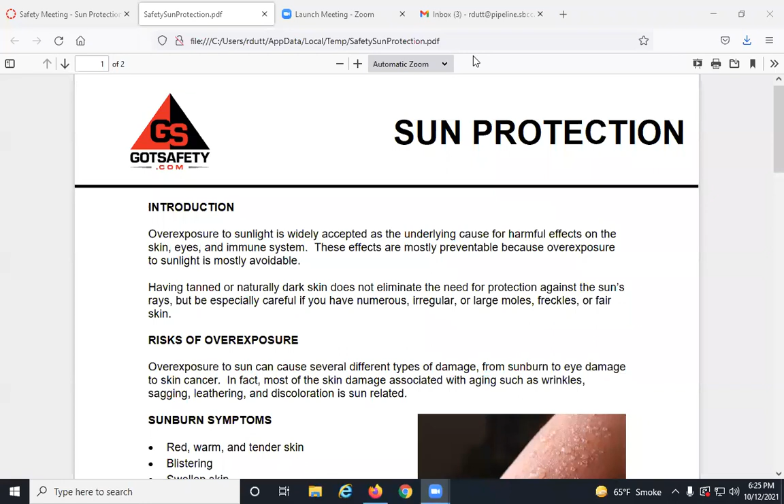Too bad Michael's not here. He could be your guy. Thank you, Zach. Appreciate that. I would have just... Every time I'll forget.

Every damn time. Okay, so this safety topic is sun protection. Introduction. Overexposure to sunlight is widely accepted as the underlying cause for harmful effects on the skin, eyes, and immune system. These effects are mostly preventable because overexposure to sunlight is mostly avoidable. Having tanned or naturally dark skin does not eliminate the need for protection against the sun's rays, but be especially careful if you have numerous, irregular, or large moles, freckles, or fair skin.

Clara, would you read that, please? Risks of overexposure. Overexposure to sun can cause several different types of damage, from sunburn to eye damage to skin cancer. Most of the skin damage associated with aging, wrinkles, sagging, leathering, and discoloration, is from sunlight. All right, Tyler, sunburn symptoms. Sunburn symptoms: red, warm, and tender skin, blistering, and swollen skin. Keep going. Eye damage symptoms: red, dry, and painful eyes, gritty feeling in the eyes, possible cataracts and macular degeneration.

Evan, skin cancer symptoms. Skin cancers often take the following forms: pale, wax-like, pearly nodules, red, scaly, sharply outlined patches, sores that don't heal, small mole-like growths. Periodically check for the symptoms of skin cancer. Usually, if you catch it early, it can be cured.

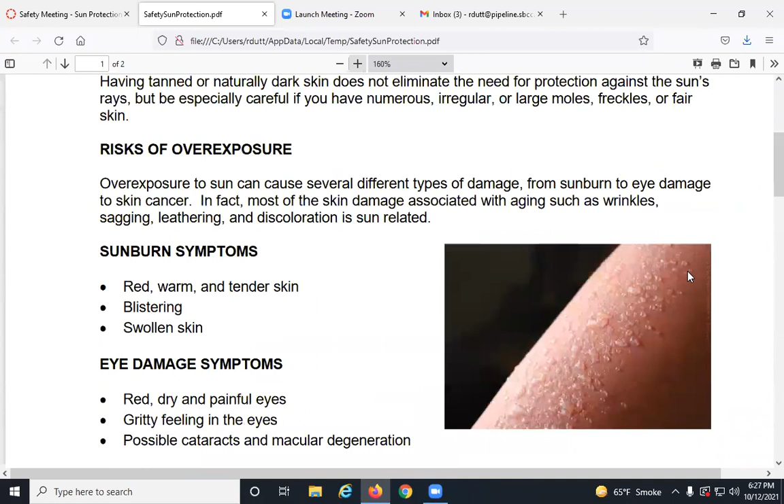Zach, go ahead. I'll read the conclusion. Overexposure to sun can have terrible consequences. But as long as you use sunscreen, wear the proper clothing, and follow the other tips listed, you will be able to avoid sunburn, skin cancer, and eye damage. Anybody have any questions or comments or anything about that?

Everybody swimming on a job site. Swimming on the job site? What's that now? It said if you go swimming or if you're sweating, then you should be fine. Yeah, well, swimming on the job site. You're going to see a video today of a job that's right on the ocean. And if I was on this job, I would probably be taking afternoon dips or lunchtime dips if it was okay. So,

Yes. I saw some of the guys wearing like wide brim hats and the hard hats over them. Is it fine to do that safety wise? Or not like that? As long as your hard hat, they float on your head, right? The adjustable band. As long as it floats on your hat, that's all you need. There's no chin straps on hard hats. I mean, they maybe make them, but I've never seen them.

Should I wear a wide brim hat to the thing on Saturday? You should always wear a brimmed hat. You should can and lose the ball hat. So should you, and so should you, and so should you, if you're in the sun all day long. It's okay. I have skin cancer, multiple skin cancers. I've had them cut out here, squamous cell carcinoma here. I think one here. It's a lifetime of sun damage before I knew any better.

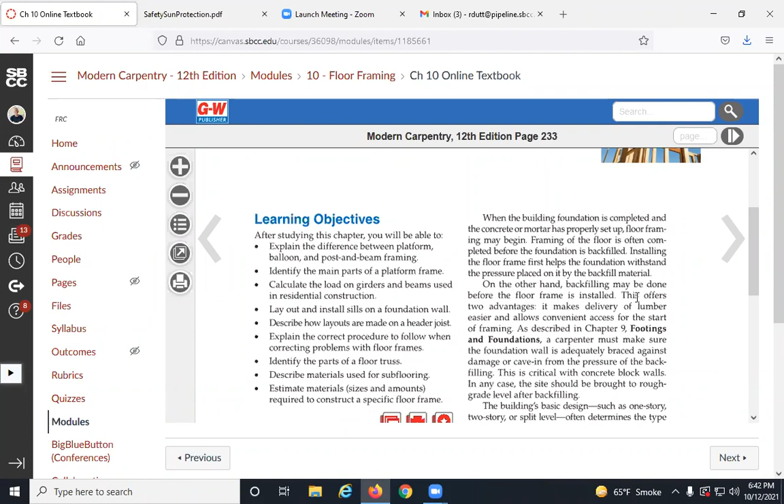On the other hand, backfilling may be done before the floor frame is installed. Yes, absolutely. This often has two advantages. Makes delivery of lumber easier. It absolutely does. Carpenter must make sure the foundation wall is adequately braced against damage or cave-in, blah, blah, blah. 1-story, 2-story factors include earthquakes may be the greatest hazard. Snow loads, we don't have to talk about those now, do we?

So now here's platform framing. A frame of joists provides the support for the walls of the first level of the building. Ceiling joists or floor joists for the second level rest on the top plate. So let's see, does this talk? Okay, so this is the figure that is talked about in platform framing. So we'll get to that. Did I miss something? Yeah, I'm sorry, I did.

So types of framing, 3 types. Platform framing, also called Western framing. Balloon framing, which is no longer used in new construction, but carpenters who remodel or repair should know about it. And if you heard that back and forth with David and I, I insist that framers do balloon frame gable end walls. A lot easier. And then post and beam framing, also called plank and beam. It's different from the other two. Its heavy structural members are at least 4 inches thick.

Kind of construction covered in chapter 25 is post and beam. So I don't think they even touch upon it in here. In post and beam construction, you have a post, 4x and larger. And then you have a lot of let-in joints, dovetail joints, half-lap joints, pin and peg joints.

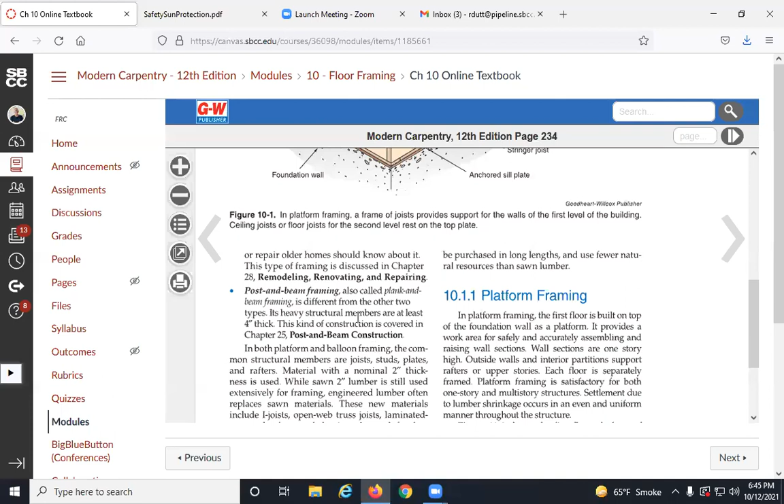Hey, Rodney, why do you say that they don't use herringbone bridging? Oh, you never see it. Herringbone bridging is a staggered bridging in the joist bay, floor joist or ceiling joist. We don't use it anymore because there's more efficient ways to go. And we pretty much use TGIs.

We're still using solid 2x members for floor joists, but more often than not, especially in new construction, it's truss joists. There's a whole section in here that says it's called regular bridging. Yeah, we don't do that around here. I won't see anybody do it. It's not necessary. Blocking is a lot easier to do.

Well, they say it's just like an X of 1x3 or 2x2 in the corners. Oh, just in the corners? Something like that, between the joists. Yeah, we'll see when we get to it, but let's take a look at it. You don't see it anywhere anymore.

So here's platform framing, right? So you build a wall at a time on top of your joists, and we'll go through what consists of the floor joist system in terms of framing, and we don't use let-in braces anymore at all. We use steel straps in wall framing. I'm jumping ahead a little bit, but it's all mixed together really. In framing, you don't have floor framers and wall framers and roof framers. You have framers, and you frame everything.

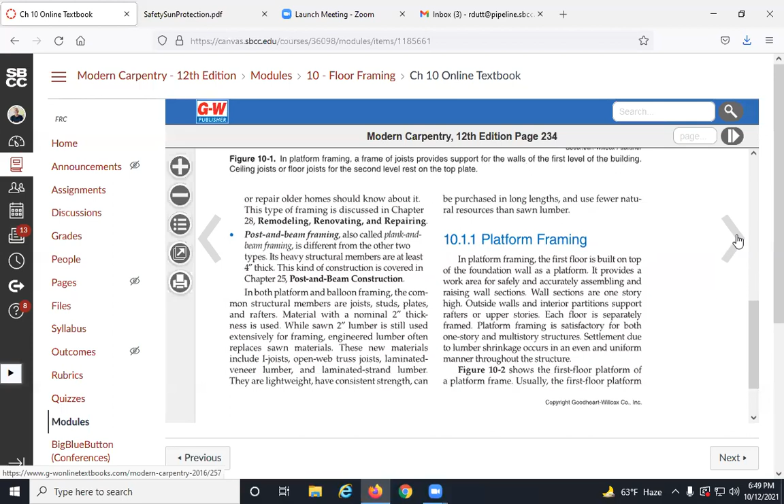Platform framing. So post and beam we're probably not going to talk about. We're going to talk about platform and balloon. So okay, there's a platform frame wall. We'll get into the framing members as you get into wall framing, but let's try to keep it to floors now. Outside walls and partitions support rafters, each floor separately framed. Platform framing is satisfactory for both one-story and multi-story structures. Settlement due to lumber shrinkage occurs in an even and uniform manner throughout the structure. Okay, that's good. First floor platform of a platform frame, figure 10-2.

So that's pretty typical with a sill, a pressure treated mud sill. Sill plate, PTMS, pressure treated mud sill laying on a concrete foundation. And then rim joist, the joists hung inside that rim joist. And then they build a plate and walls on top of that. First floor sill is anchored to the foundation. So that sill is bolted to the foundation with anchor bolts, which we heard about in your foundation test, right? Anchor bolts around here are what? 5/8 by 10 galvanized anchor bolts. Exactly correct. 5/8 by 10.

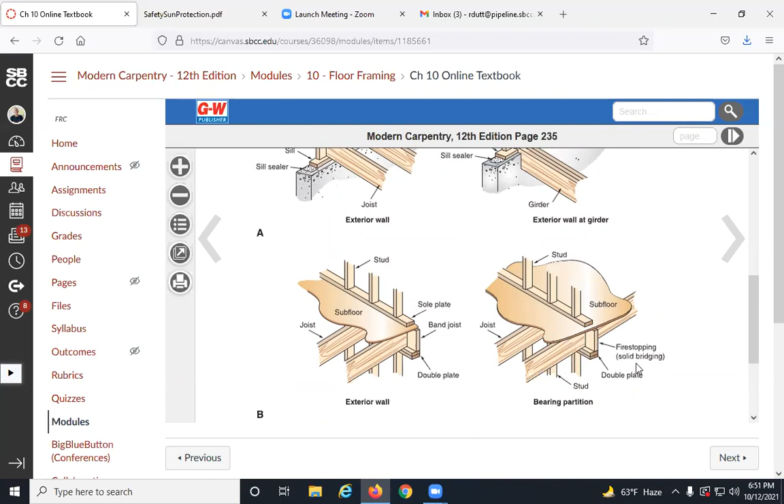So yeah, fire stops. That's in walls. But anything over 10 feet, you have to fire stop it. And when your ceiling joists, which is what these are right here, pass over a bearing partition, they need to be blocked in between. It's called fire stop or solid bridging, but I call it blocking. And there's a band joist. That's on the outside. That's cool. Okay, what else we got here?

Platform framing details, sill sealer, second floor framing similar to the first. What's that? Did I miss something there? Usually the first floor platform rests on a sill. Right there. There's the sill. This is a wood member that's attached by bolts or other metal fasteners embedded in the foundation. The anchor bolts we talked about. The platform rests on an underpinning. That would be the foundation wall, the poured foundation wall.

And this place looks like maybe a block wall that comes up out of the ground, out of a foundation. Hard to say. Can't see it all. Okay, so sometimes the platform rests on an underpinning. This is a wall made of short studs that extends above a low foundation. That's called a cripple wall. It's usually used on a house that is not to have a full basement. Fire stopping can be used to prevent the spread of a fire.

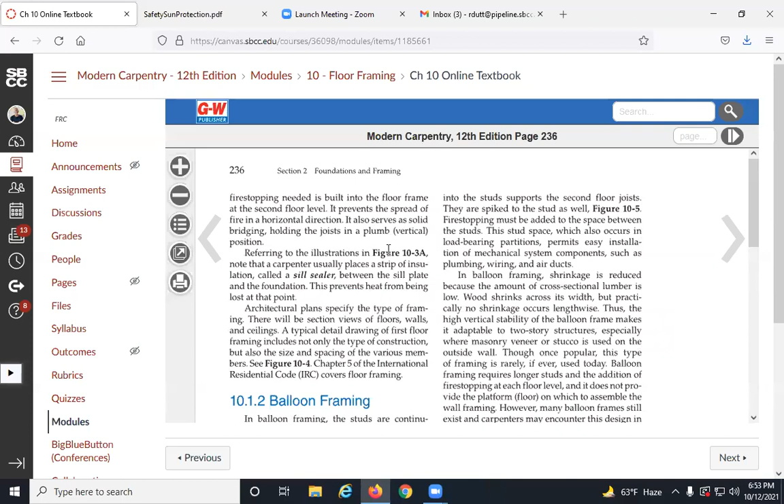Fire stopping is needed to be built into the floor frame at the second level. Absolutely. It prevents the spread of fire in horizontal directions. It also serves as a solid bridging, holding the joist in a plumb position. So it keeps your joists from rolling over if they're blocked in between. But I'm not going to jump there yet.

So what time is it? Okay, we're going to finish this page and take a break.

Referring to the illustrations, note that the carpenter usually places a strip of insulation called a sill sealer. Okay, so in balloon framing, let's just jump to this sill sealer. So see sill sealer there on top of that concrete stem wall, which is a foundation wall, right there. Some sill sealer, piece of insulation or something, even though it's pressure treated mud sill, to keep the wood off the bare concrete, put a sill sealer underneath. It's a good idea.

Now, some people do this where they set the bottom 2x6 mud sill all the way flush with the foundation. And then they run the sheeting out over the foundation. I don't mind that so much at all, actually. But I like this better, it's cleaner. Because this is set up really well for plaster. You get 7/8 of an inch of plaster on top of that with a weep screed and the plaster.

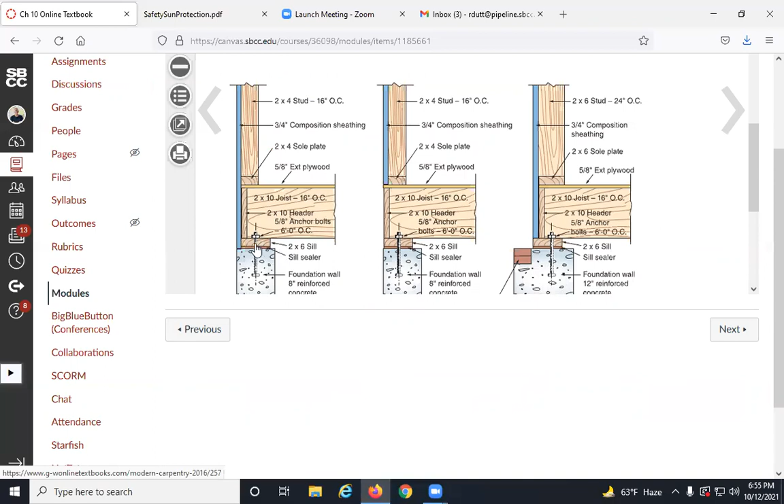And then the plaster, the lath laps that joint, which is the one thing I kind of like about hanging the sill flush with the foundation wall and the sheeting over it, is to drop the sheeting down slightly so it bridges that joint. Because the last thing I want to do is get anything from the exterior underneath that sill. Just something to think about when you get down to there.

Why is the middle one your least favorite? Because it leaves all this. I like to see the sheeting go all the way down. I think it shears the whole thing. Didn't James say the sheeting wicks water from the outside if you do it all the way over? It can wick water if you don't do it right, if you don't seal the bottom of it. But how much water is it going to wick? In the first place, water's got to be in proximity to it to wick water, right?

So if you're 6 inches off the deck, that's your minimum, and that's how far your piece of plywood is. You should not get water any closer than 6 inches. And water 6 inches away isn't going to wick up your wall. Now, if it floods up and comes over that plywood, then yeah. If it gets to the edge of the plywood and it's not sealed, then it can certainly wick water. So this is a better way to capture it than hanging it out. But this is the way I prefer to do it.

And in balloon framing, the studs are continuous. So I'll show you after the break. I'll just draw something for everybody in case anybody's not seeing in their mind's eye what a gable-end balloon frame looks like. I'll do that really quickly.

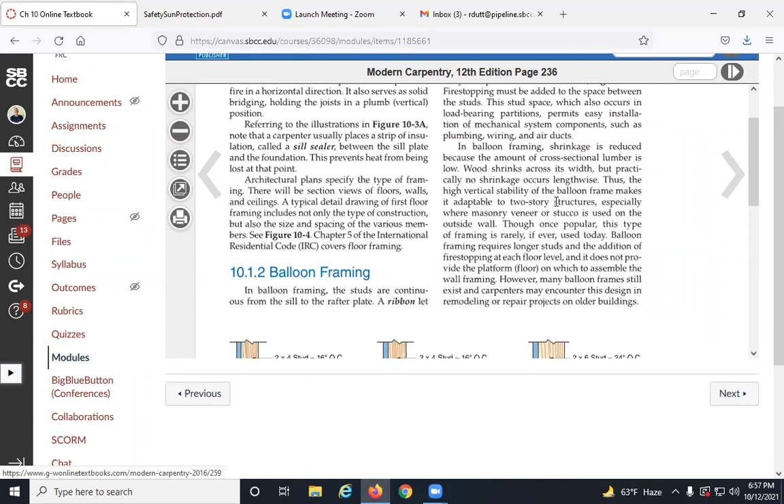And so let's come back for girders and beams at 7:10. We're gonna break until 7:10, gang. I'm gonna stop the share.

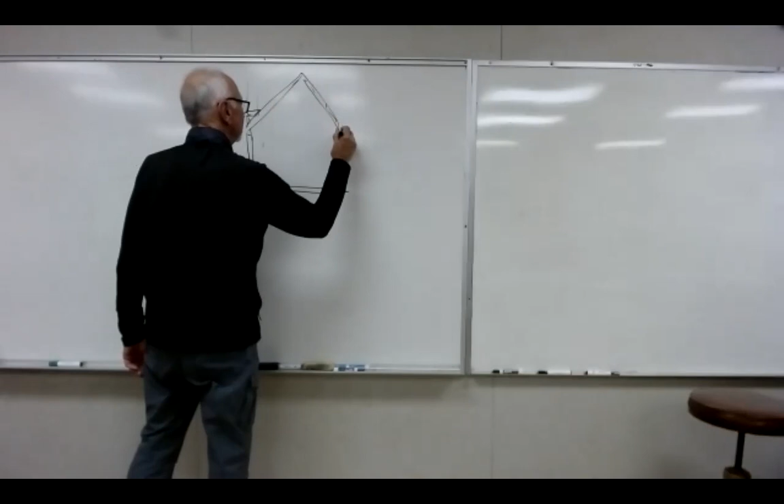That's platform framing. In a gable end wall, platform framing would be to build an 8-foot plate that's connected everywhere else, then build a gable end wall with a plate and studs, which would all be crippled studs. What that does is create a hinge point between the two plates. It's a lot easier and better just to snap out on your floor or slab and gable end, and frame it like that. That would be balloon framing.

There's a variety of ways to hang ceiling joists. You can run a ribbon and put hangers to hang your joist. There's a variety of ways to do it, but I think the best way is to hang a ribbon. So if it's a side view of a stud, one of these studs continues on up, a ledger consistent with your ceiling joists, and then your ceiling joists are hung with hangers, U26 hangers. That'd be your ceiling. I hope that made sense.

But the only thing you want to balloon frame is a gable wall. When we do it nowadays, we don't have those long lengths anymore. We don't use those anymore.

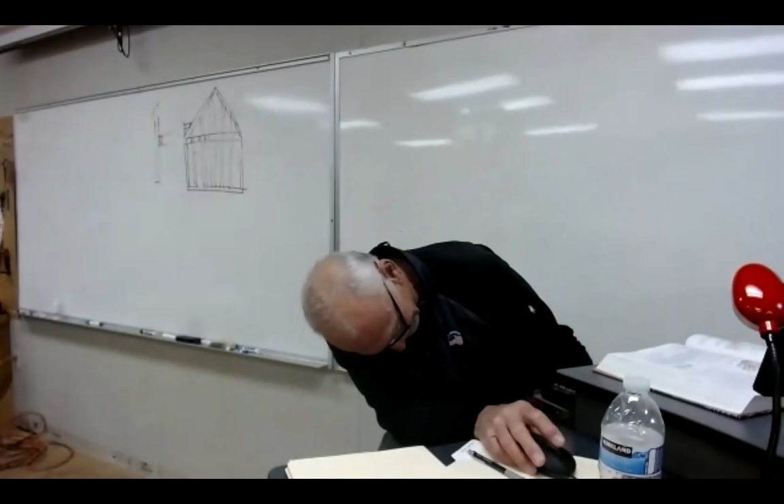So let's go back to the book. I'm gonna drop this screen again. We are recording, we're going to show the screen. Girders and beams, yes. Come on, does it come up? Okay.

So LVL, who knows what that means? Laminated veneer lumber, exactly correct. LVL and glue lam beams, floor beams are what's happening, and so are truss joists. But really, you're going to go with whatever the plans call out. It depends on the area you live in, what the architects and engineers are specifying, and that's what you're going to follow, period.

So joists are the horizontal members of the floor frame. They're also the horizontal members of the ceiling frame, but we're not there yet. They rest on top of the foundation walls, girders, and the top plates of the second stories. Span is the distance between the walls. Usually the span is so great that additional support must be provided. Girders, called beams, rest on foundation walls, posts, or columns underneath the house, and they support the joist at their midpoint. Most joist spans have a mid-span beam to support them, so they can run long joists instead of short joists. Girders may be solid timbers, built-up lumber, engineered lumber, or steel beams. Sometimes a load-bearing partition replaces a girder or beam.

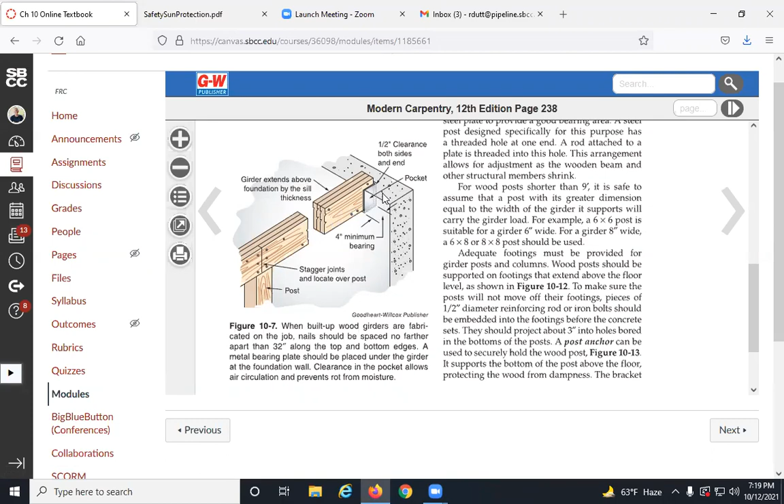Glue lams are a bunch of wood pieces glued together in the factory. Steel beams, we do use those here quite a bit, wide flange and narrow flange, but mostly wide flange I-beams or W-beams. If your engineer calls for it, he's going to tell you how to make the connections. It's going to be a steel column or a wood column supporting it, and if it's going to get Nelson studs attached so you can bolt wood to it and wrap it to get rid of the look of the steel, which generally we don't show.

A Nelson stud is a welded-on threaded stud anchor, usually 3/8 but they can come 1/2 inch or bigger, in various lengths. So you can drill holes and bolt a piece of wood, but you can nail other things too. I just skipped one - steel beams, posts and columns.

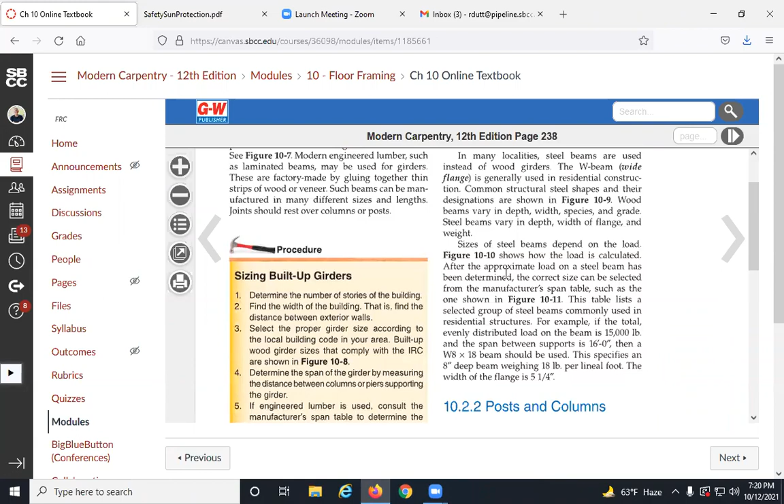Just for instance, the size of steel beams depends on the load. 1010 shows how the load's calculated. Where's 1010? Let's see. Is it 1010? Nope, 10.8. There's 1010.

This diagram shows the method of figuring loads for the frame of a 2-story home. So it measures, for instance, the roof. For a dead load, it's the weight of the wood shingles, and they equal 10 pounds a square foot, which isn't that tough to figure out. To figure the live load, you've got to account for wind and snow requirements, usually 30 pounds a square foot, and then get beams and lumber engineered to meet those requirements.

But don't get too far ahead of yourself, because almost all that stuff, if you have to do it, is going to be spelled out for you by the engineer and/or the architect, and you just have to follow directions.

For example, if the total evenly distributed load on the beam is 15,000 pounds and the span between supports is 16 feet, the table will tell you that a W8 by 18 - that's an 8-inch deep by 18-pound-per-foot W-beam - should be used. So the span tables will tell you what you need. A lot of engineering you can figure yourself with span tables. Personally, I like to let the engineers do it, but I'm willing to engineer some stuff myself too, especially over-engineering it.

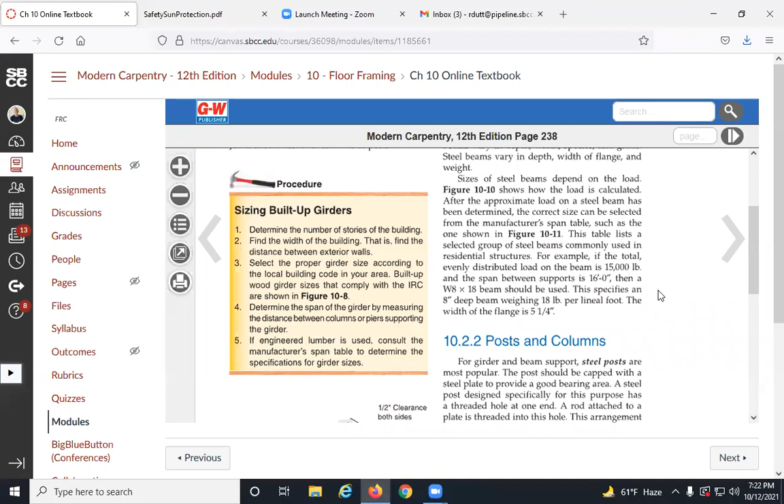Posts and columns, for girder and beam support - steel posts are most popular, and we use them a fair amount, but we use a lot of wood too. We could have used steel columns or steel posts in the shade structure too. For example, a 6x6 post is suitable for girders 6 inches wide, and for a girder 8 inches wide, a 6x8 or an 8x8 post should be used.

Would they rust though? No, no, they have to be galvanized and painted, treated like they're going to be outside, and then they wouldn't rust. It could rust if you get through the protective coating - it could rust where wood won't, but wood rots.

Adequate footings must be provided for girders, girder posts and columns. Wood posts should be supported on footings that extend above the floor level, as shown in figure 12. Okay, let's see that one.

Steel's probably more expensive, huh? No? Oh, that's surprising. But what makes them more expensive is the welding of the flanges - the welding and the flanges make the steel posts more expensive, but the wood's now more expensive than the steel. Oh, the actual wood, that's crazy.

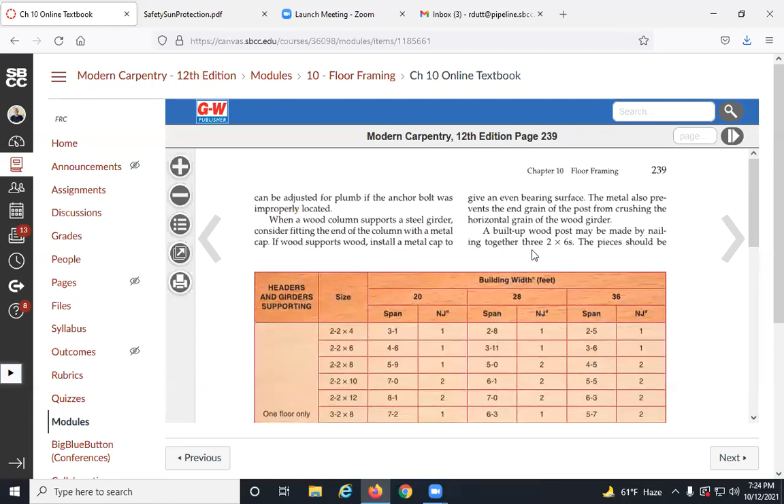You can do a built-up post nailing 3 2x6s together, but then why would you if you can go to the board store and buy a 6x6, unless you want to use some material that you just got to get rid of.

There's some various structural steel shapes. There's that table for how you figure live and dead loads.

But again, it's not likely you're going to be figuring this anytime soon. There's going to be people to figure this out for you until you get way more experienced, and then you can figure it out for yourselves. But it's nice to try to figure out what's going on.

So that when you're told what to do, at least you know, so you can say, hey, why aren't we using a W8 × 21 on that? Because it looks to me like the span on that for 10 foot is 29.1, and you're using a...

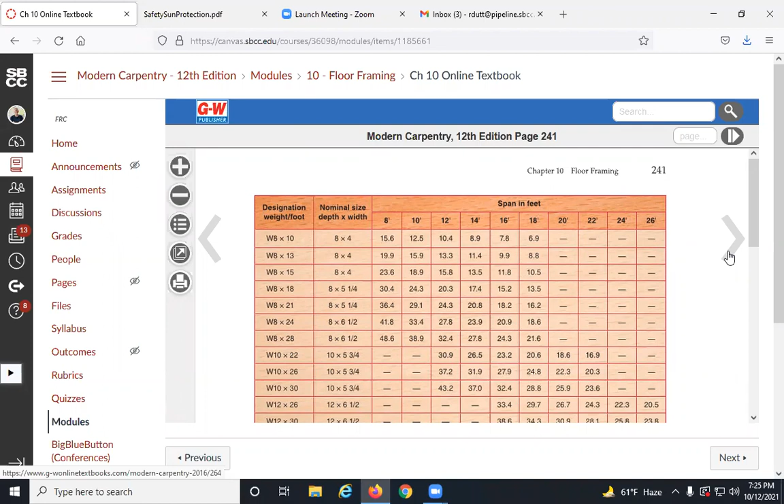Really? I thought you were just a laborer. Dude, you're promoted. Okay.

Framing over girders and beams. So when you have a lap, right, so right here, you've got these joists lapping. They lap together and they usually lap 2 feet each way.

And they want to lap over something, a girder or something that supports them where they lap. Not midspan, but you need something to support the lap. They can't just have a lap hanging out in space.

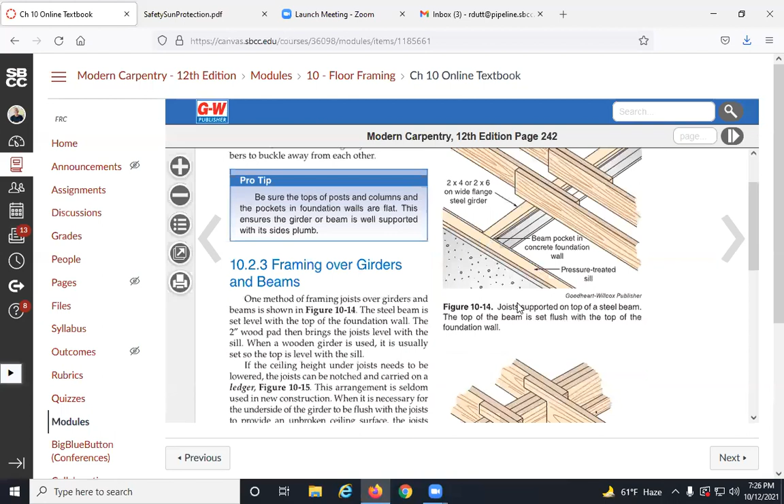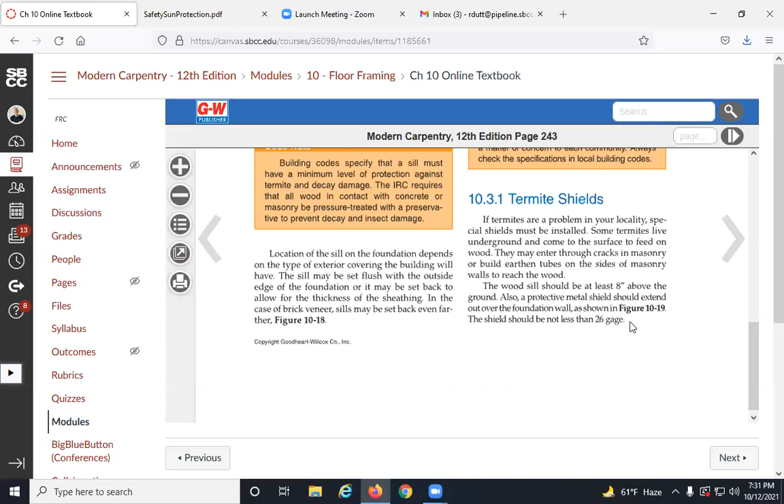The wood sill should be at least 8 inches above the ground. Also, a protective metal shield should extend out over the foundation wall, as shown in figure 10-19. It should be not less than 26 gauge thick steel. So there's a termite shield. That's that metal shield. So I guess it keeps the termites from climbing up your foundation walls and then getting onto the sill.

They somehow hit that metal and go, oh shit, guys, there's metal up here. We can't go any further. I don't know why it does that. I've never seen one of those either. Exactly, have massive brains. No, they have a hive brain, right?

Canada and Alaska are considered to be region 4, Hawaii and Puerto Rico region 1. In areas where termite damage is great, additional measures should be taken. Soil around the foundation and the structure can be treated. That's one of the reasons why wood to soil contact is no, 18 inches above, right? Soil underneath your raised foundation, bottom of your floor joist, 18 inches minimum crawl space. But it's for crawl space, but it's also to keep creepy crawlers from getting on the wood. Keep it 18 inches away.

Installing sills, not in the States. What's this? If you have termites and, say, you're looking at a piece of wood that has termites, what would you do? You have to excise it, pretty much. So if you discover you have termites, two things need to happen. One is you need to kill the termites, or let them live, but eventually they will get killed if you sell your house, or at some point you'll have to tent your house and kill them because you'll get tired of it, like I did. I did mine about 10 years ago, and I had my house for probably 20 years then.

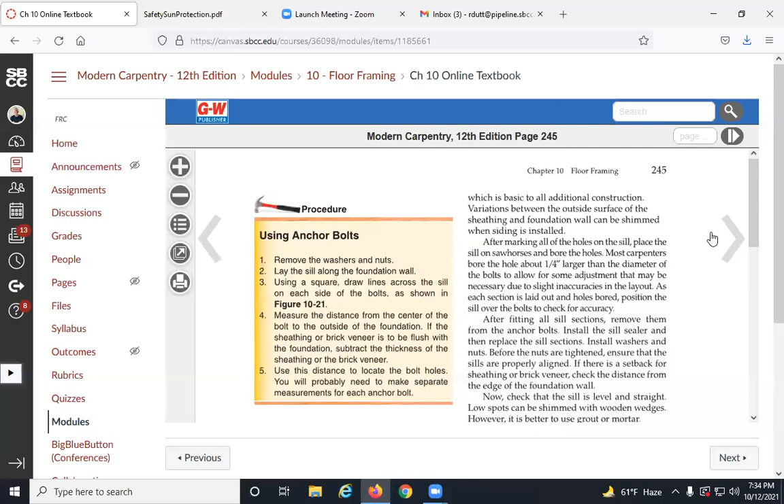So ideally, you're going to cut away all the termite damaged wood. And once the termites are gone, whatever wood you can't cut away that's visible and it's too much trouble to cut away, then you're going to want to fill it with either Bondo or some epoxy wood filler to fill in all those places where the termites have made inroads and opened up your solid wood where rot could get. Termites. Wood termites. Laying out the joists.

Well, the one thing you want to think about when you lay out your joists, they call this a header joist. I call it a doubler or a rim joist. Our friend would call that a rim joist, but the rim joist lays on the outside of the sill plate and the joists hang off of that, right? So your joist is going to sit on the sill plate and it's going to butt to your rim joist, which he isn't showing yet. Band joists are those joists that sit on the sill to which other floor joists are butted to and attached. They're called joist headers or rim joists.

God, they actually know. The position of an intersecting framing member may be laid out by marking a single line and then placing an X to indicate the side of the line the joist is to be installed. So this is very typical. So if you want to put a joist on this band joist or rim joist, you would put a line which indicates where you want to line up the edge of the joist and then an X on the side that the joist goes. So that if you go along in your layout and you see an X, you did it wrong. You should cover all your X's.

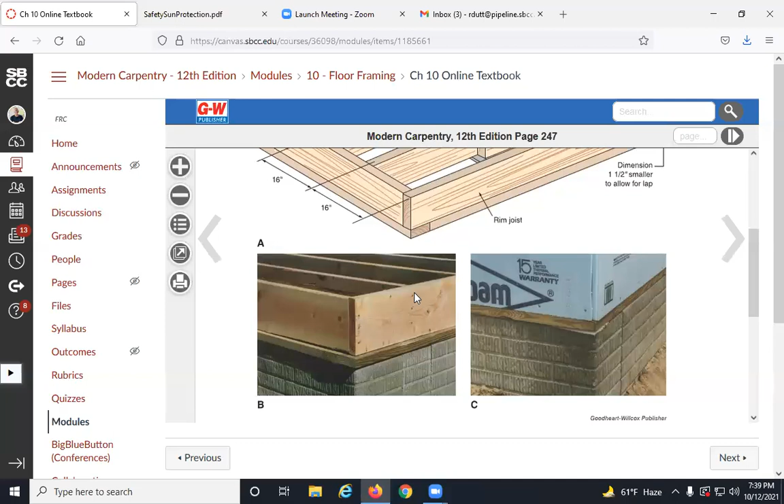And if you start going crazy on this layout and go 4-foot centers, but don't take into account that first one, make sure it lays out right, then you're gonna have a little tiny ripper subfloor, which is not the end of the world, but ideally you want to lay out so that you can drop on a subfloor, right? Drop on, drop on, drop on. Because the way typically we frame, we do the floor joists, sheet the whole thing, drop the sill plate on top of the sheeting and go from there.

The joists lap over the center girder, spacing the first joist is different. Okay. Some carpenters set back the stringer and headers, leaving a ledge on the sill, which is the same thickness as the sheeting, which is what happened here. This is called trimmers. So yeah, this is a good one. Select straight lumber for the band joist and lay out standard spacing along its entire length. Figure 27. Let's look at 27 here.

Okay, so here's 27. So here's layout, right? And you're gonna lay out for your stairwell. It's gonna go down to the basement. You're gonna put your doublers in there, or what's called a trimmer, king stud and a trimmer, or in this case, I don't know if they call that a king joist or not, but it's a trimmer joist. These guys are gonna get tailed because this is an opening, it's gonna be cut. But you don't cut them when you lay it out. Typically, just do the layout, and then when your floor is done, you go ahead and cut your openings, and run your perpendicular joists, your header joists.

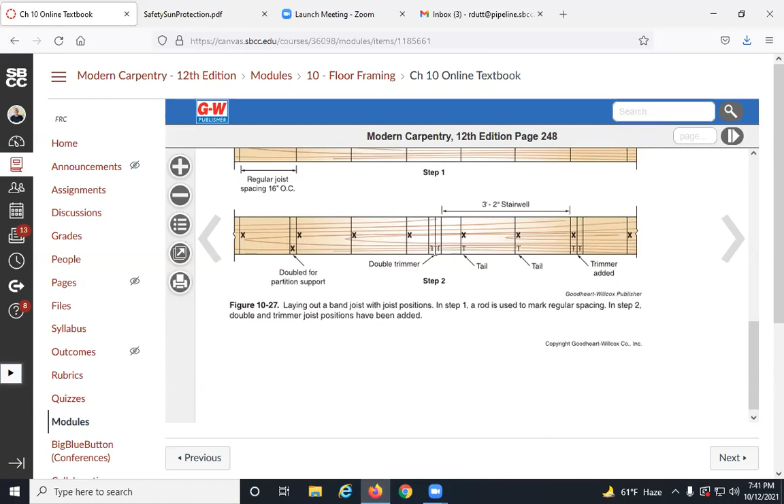I know some of this is relatively complex, and framing is not real simple. Some parts of it are relatively simple, but it's generally kind of a complex thing to do to understand all the different aspects of framing. We're going to try to keep it relatively simple and not overwhelm you with information, but there is a heck of a lot of information in there.

Just suffice to say, you can see that's a partition above the floor. That would be the place that your engineered plans should have you putting a girder to support that under the floor. And then here's your double headers for when you make openings, right? You do double trimmer either side. So you do all that layout in your joist to joist.

And then when it's done, then you come in and lay out, snap out, cut out. You cut 3 inches back and 3 inches back. That's 6 inches over your opening, because you're going to cut that out, and then you're going to nail on a double header. You're going to nail that one onto the ends of the joist you cut and in there too. And then you're going to nail another one onto that, and you're going to nail that way. And the same thing over there. And that's going to support. That's what's called heading off.

So that opening in the floor is the same that you would do in a ceiling, and it's the same that you would do in a roof. So when you make openings in roofs, ceilings, and floors that have rafters and joists, you can make cutouts right in the middle of them, but you've got to head them off. And that's how you head them off.

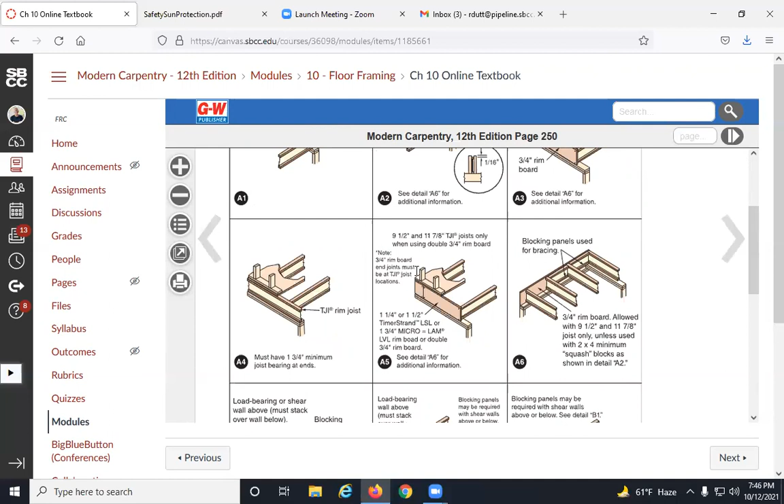Blocking panels, squash blocks. What is this? Squash blocks? Yeah, well, the thing about a truss joist floor, an I-joist floor, is it's a sturdy floor, and they make a quiet floor. And if you install them right, and if you glue down and use a screw nail on your floor sheeting, then you won't have a squeaky floor. And there is nothing worse than a squeaky floor because they're really hard to fix.

But all subfloors need to go down with construction adhesive, PL 400 or equal. All floor construction subfloors need to go down with adhesive. And either a ring shank nail, which has rings on its shank, kind of like a screw nail. So it really has a grab, because wood moves all the time.

It's a live thing, and it likes to push out nails. Wood likes to push out nails. And if you have glued down your floor and used a ring shank or a screw nail, it's not likely to squeak or move that nail around. You need to do everything you can to make a really solid tight floor, because squeaky floors are the worst. Especially when they show up after the floor finishes are down, and then they're really hard to fix. They're hard to fix anyway.

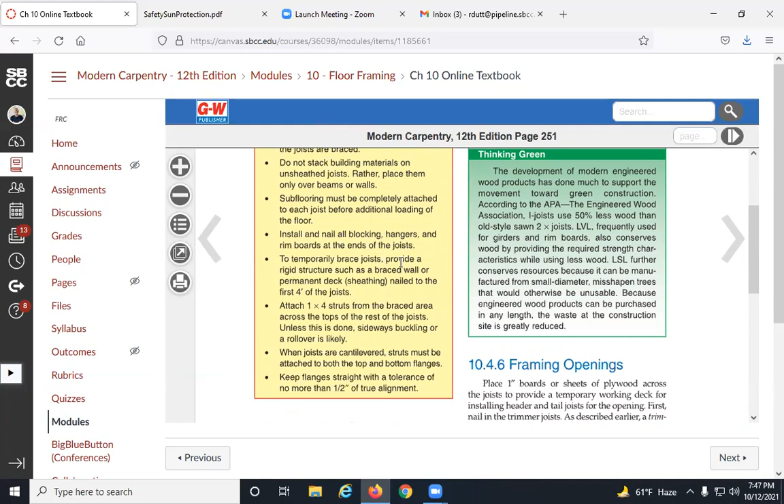So working with I-joists, they're unstable until they're braced properly. So don't walk on them until they're braced. Don't stack materials on them. Subflooring must be completely attached to each joist before additional loading. Nail all blocking hangers and rim boards to the ends. Temporarily brace them. Add 1x4 struts from the braced area across the tops.

Nah, forget that. When the joists are cantilevers, struts must be attached at both the top and bottom flanges. Yes, okay, because they do make struts. They make metal struts that attach and nail when they're cantilevered, like a bridge blocking. See if they get into that. I don't think they do. Installing solid wood joists. Same thing, only easier, but not as sturdy.

Some carpenters lay a bead of caulk along the joint formed by the band joist and the sill to keep out the air and dust. Sill sealer serves the same thing. It's a good idea. Really good idea.

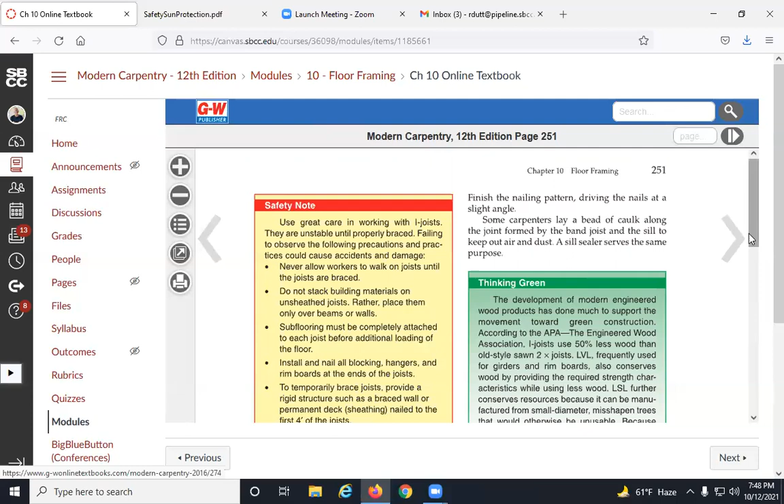So here's bridging. Bridging may be eliminated if the joists are properly secured at the ends and subflooring is adequately and carefully nailed. Bridging has been eliminated. Nobody bridges anything anymore, ever. I haven't seen any bridging. I can't tell you how long since I've seen bridging. And you used to see it. If you rip up old stuff, you'll see bridging. And that's the way they used to do it. Herringbone bridging or cross bridging. I don't see an example of it because nobody does it anymore.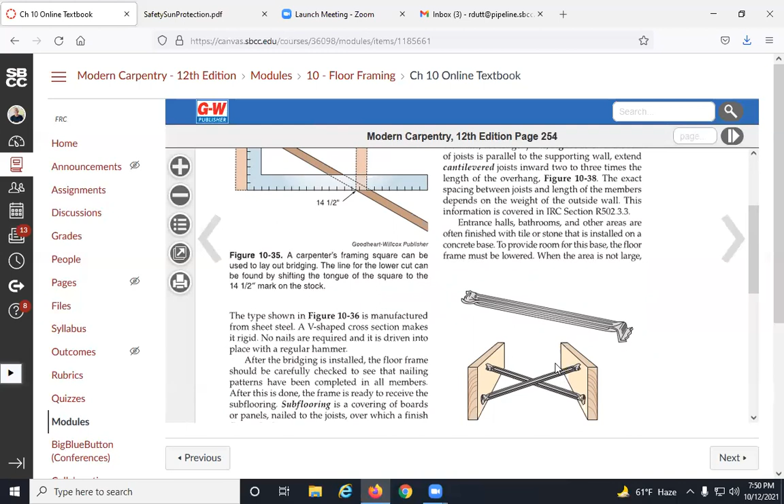Basement level, if the run of joist is parallel to the supporting wall, extend the cantilever joist inward 2 or 3 times the length of the overhang. So that's typical of cantilevering anything, 2 times minimum the cantilever, right? So for instance, you're going to cantilever out a 2x6 joist 3 feet past its foundation wall. So how far back do you need to go? You need to go 2 times the cantilever. So 6 feet back to lap onto that joist, right?

6 feet back. So you have to take a joist out to the sill, and then you can cantilever the joist by going 6 feet back and nailing it, and you can cantilever out 3 feet. And then there'll be something showing you a cantilever. We'll get a drawing to show that.

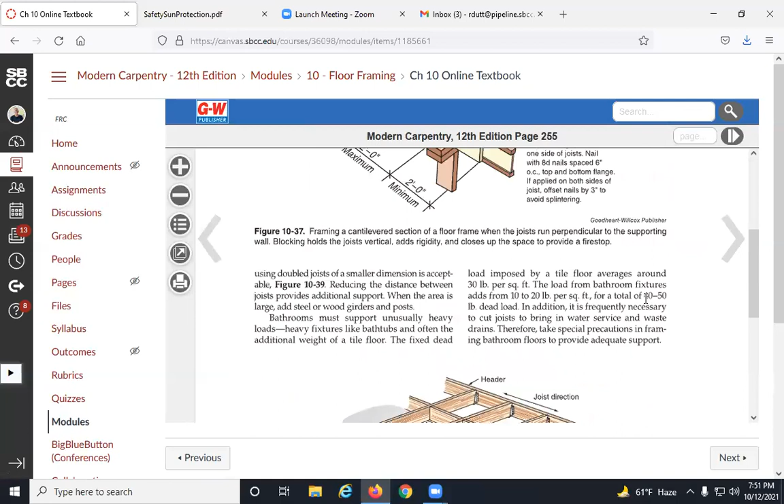Oh, this is a really good idea too. Bathrooms must support unusually heavy loads. Heavy fixtures like bathtubs and often the additional weight of a tile floor. The fixed dead load imposed by a tile floor averages around 30 pounds a square foot. The load from bathroom fixtures adds 10 to 20 per square foot for a total of 40 to 50 pounds of dead load. In addition, it's frequently necessary to cut joists to bring in water service and waste drains. So take special precautions in framing bathroom floors to supply adequate support.

Now, what you might consider in doing a bathroom floor is either doubling up, right? Or spacing them closer together. I would just do 12-inch centers. 12-inch centers should support anything that you want to put on. In this case, they've doubled all the joists. But they also say space closer together, more support required.

But you can see, by the time you get all that float and tile on there, and let's say it's a soaker tub, some of these big soaker tubs are like 50, 60-gallon tubs. How much does 60 gallons of water weigh? 480 pounds. That's a quarter of a ton. Water weighs 8 pounds a gallon.

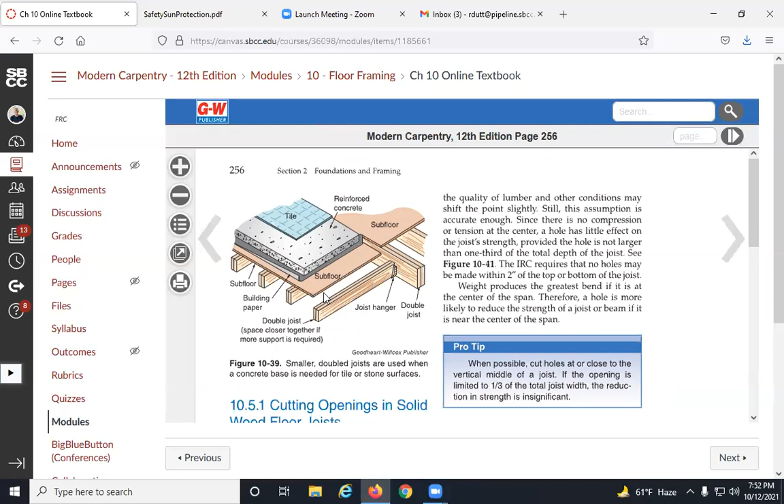Okay, so cutting openings and cutting holes in I-joists. They'll all tell you where you can put holes in these I-joists, how far from the end, how big a hole. And if you need to cut bigger, just ask the engineer. And usually on a set of plans, if you pull out those plans that I have for Mangone, you're going to see so much boilerplate, and you're going to find I-joists, and it's going to tell you.

You can put an X amount of hole this close, and in the field you can do this and you can do that. And if you want to do more, just call the engineer and say, hey, I want to do that to that. And he'll tell you yes or no. And he'll say, okay, you can do it, but do this. I do that all the time.

Have you seen those sitting soaker tubs? What about them? Have you seen them? No. Like the Japanese sitting soaker tubs? I have. Yeah, they're pretty cool. Yeah, they're very cool. Patrick's installing one in that. Oh, that's that bathroom? Yeah, that Japanese one. That's the bathroom.

So open web floor trusses. So there they are. You can buy an open web floor truss, and the webbing is done with metal. You can have them engineered and built to your spec. They're way stronger than floor joists, and the video I'm going to show you, that's how this floor is done, with truss joists.

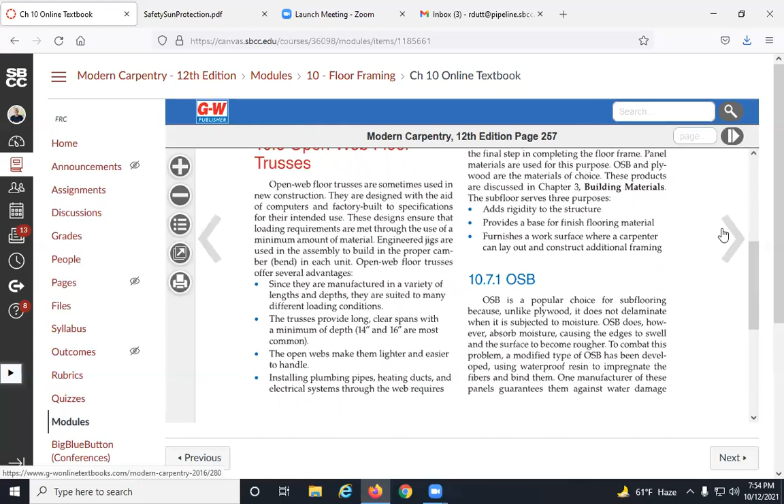OSB, popular choice for subflooring because it doesn't delaminate when it's subject to moisture, but it does absorb moisture, which causes the edges to swell. It's cheap stuff, but it does the job. You're going to cover it up anyway. What about 500 days? One manufacturer of these panels guarantees them against water damage for 500 days, which is more than enough time to enclose the building. Okay.

So the long edges should be running perpendicular to the joists, right? The long edges. So the 8-foot edge is nailed. Yeah. They're self-spacing. Yeah, so a lot of your flooring, like a Sturdi-Floor or Struct floor, is a plywood floor. It's probably the most popular floor.

Struct floor, which is short for structural floor, or Sturdi-Floor, S-T-U-R-D-I, because they're T&G. So a 3/4 T&G Sturdi-Floor nailed down with ring shank nails and construction adhesive is going to give you a really good floor. It'll really tie that whole floor membrane together.

Yeah, Dave? How do you mark off where the nails or screws go? Usually snap lines, or you've got a 4-foot straight edge or level. Just give yourself a couple of marks. And subfloors are covered. You're never going to see a subfloor on purpose. They're going to be covered up with something. They're not going to be your finished floor.

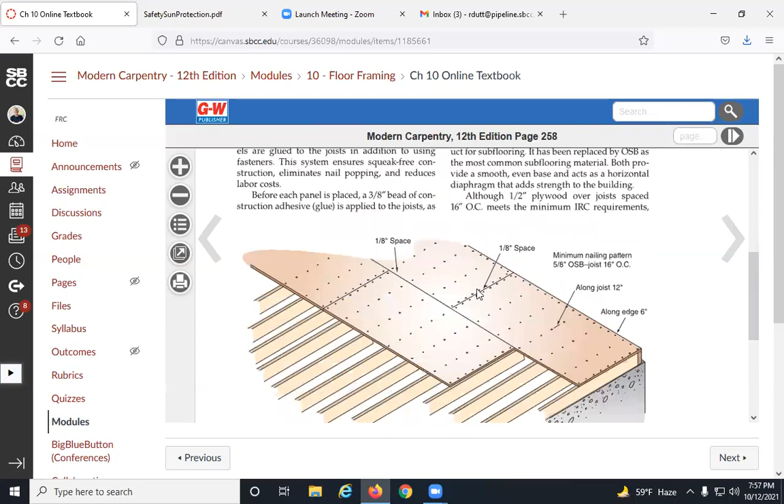There's some nailing tips. There's a guy putting construction adhesive on the joists. Here's a power screw gun. It just goes wham from standing up. That's a great way to put down floors. Using a maul to beat that over, with a piece of wood to protect your T&G.

Typically, if we've got T&G, let's say the groove is in over there, and you want to beat on the tongue, we have a ripped piece that has the groove on it to slip over the tongue to protect it, and beat on that. So you're not beating on the tongue and mashing it up, so your next sheet's groove can't go onto the tongue.

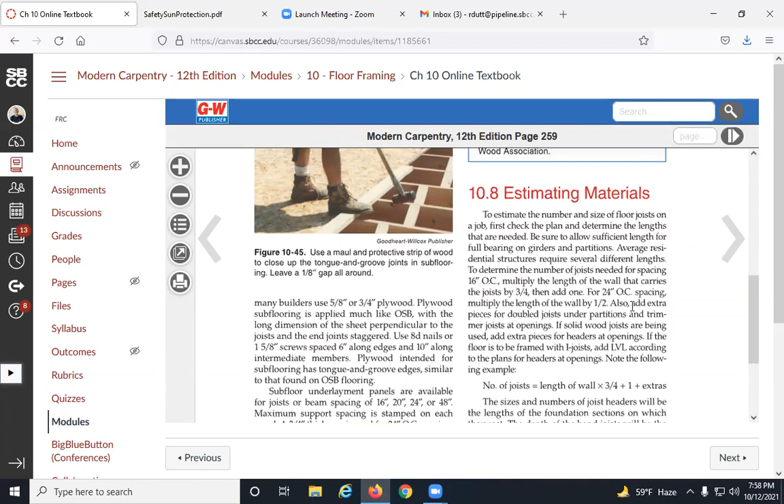Wow, we're getting right into estimating materials. So estimate the floor joists. Okay, so what did I tell you? If it's 16 centers, multiply by 3/4, then add 1. If it's 24 centers, multiply by 0.5 or half, and add 1 as well. I didn't know that because we rarely do 24-inch center joists.

The number of joists equals length of wall times 3/4 plus 1 plus any extras, right? If you've got any holes or any additional double joists, you count where you're going to have doublers or things like that. So your estimate is going to include the joists, the full length, and any blocking, and band joists.

There's a complete estimate for joists, joist headers, solid blocking, and band joists. When using sheet materials, there's practically no waste. The net area is divided by 32, rounded out to the next whole number.

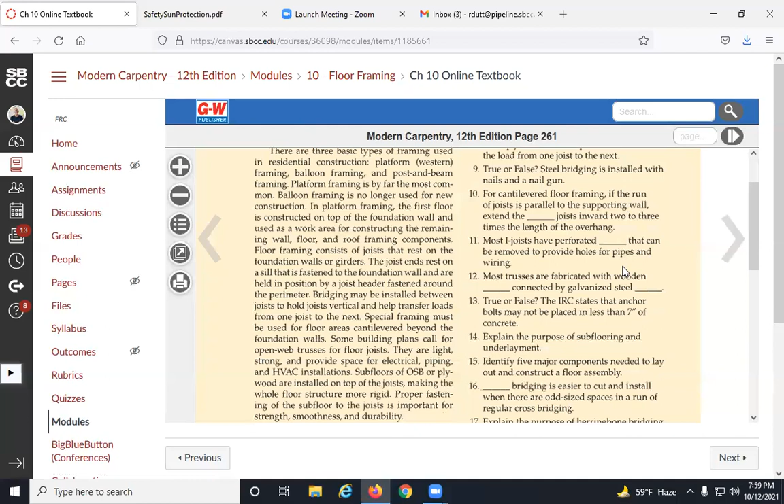Okay, so three types of framing. Let's go into... let's see. Where do I want to go? I forget where I am. Okay, we're on 10, right?

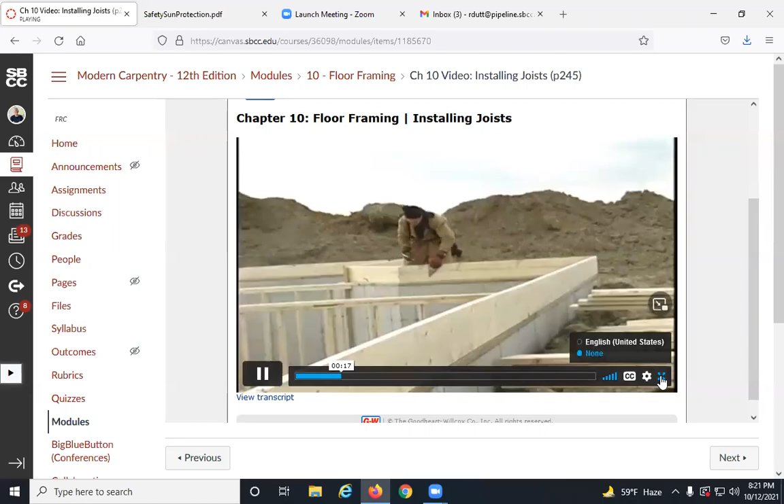Mark the location of the floor joists on the rim joist using a square. Draw an X to indicate the position of each joist. Add the position for any double joists and trimmer joists that will be required along openings. Where regular joists will become tail joists, change the X to a T.

Sight down dimension lumber for the floor joists to find the crown. The crown is the edge of the lumber that curves up in the middle. Install dimension lumber with the crown up. This will prevent the floor from sagging from its load.

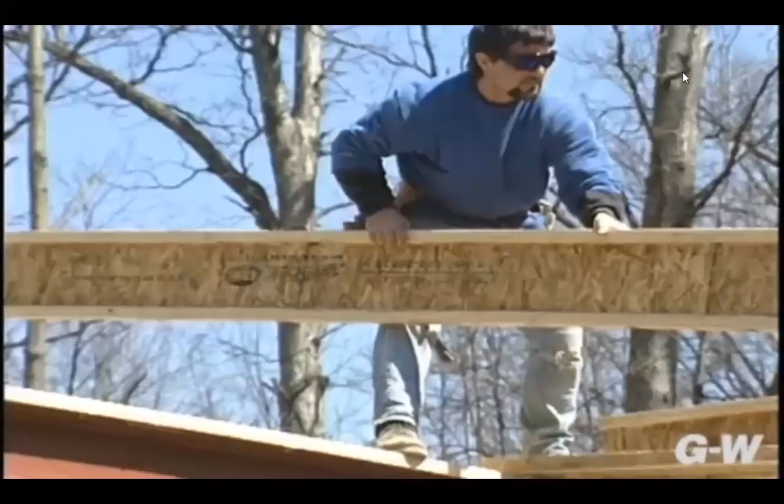To aid in lifting or positioning long joists on the sill and girder, slide them along the top of another joist. Make sure no one is working below you. Lay each one down flat next to the joist layout marks.

Two carpenters normally work together on each end to install floor joists efficiently. Swing the joist upward, then hold the joist end tightly against the rim joist and along the layout lines so the sides will be plumb. Nail the top of the joists to the rim joist, then align and nail the bottom before nailing in the center. Align the other end of the floor joist with your layout lines and toenail it to the sill. Repeat this procedure on other floor joists.

Install the rim joists. Measure and cut them to length, then toenail the rim joist to the sill plate and nail the edge.

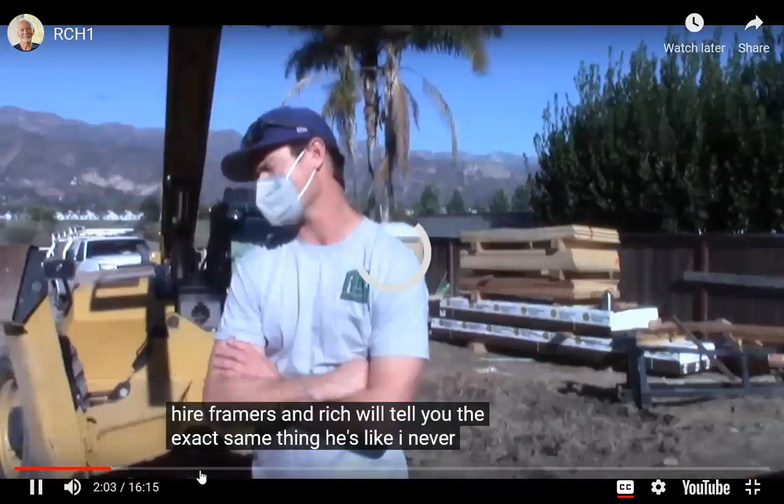That's an interesting one here, because we actually were working concurrent. So that's all probably exterior sheeting right there. It looks like this is some joist stuff. Is this right on the beach? Right on the beach. All shed roofs? No, we've got a bunch of flat roofs that have already been done.

The site here is really tight, so we're not able to get our grade all around the building. So we're having to build all of our decks, put temp seating down, and then come back and build those taller rake roofs so you can get your cradle up there, or just so you can lift. Just so we can deck, we get material, slide it in, set up scaffolding in the back, and have a safer work environment.

And genie lifts on the site? Yes, is it a genie lift? Yep, and there's just a lot of big lumber. Guys, do you know what a genie lift is? Anybody out there in Zoom land know what a genie lift is? Okay, I'm gonna explain a genie lift.

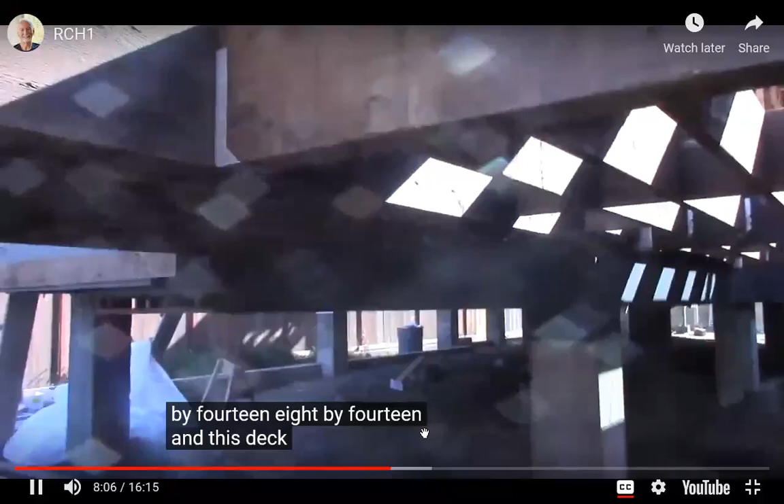They're framing on top. Yeah, the deck framing is all 2x12 joists with 6x14, 8x14. This deck is the deck we're talking about, right? So these are 6x14 main supports, and all stainless.

All stainless hardware, even the pads. It's solid, 5/8 stainless, 1/2 inch stainless, 3/4 stainless, holy God. Then we'll get that back, our concrete stuff back out here, to dry pack it all. Yeah, and this all gets dry packed, which is just a mortar without water pretty much, but enough water so you can shove it in there.

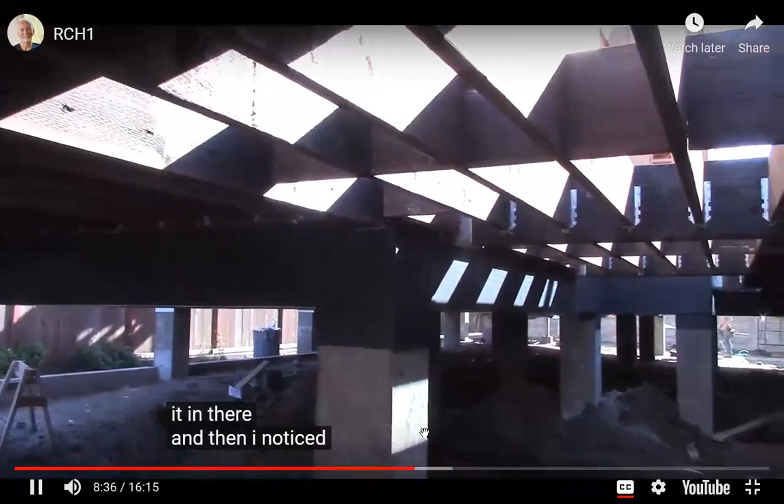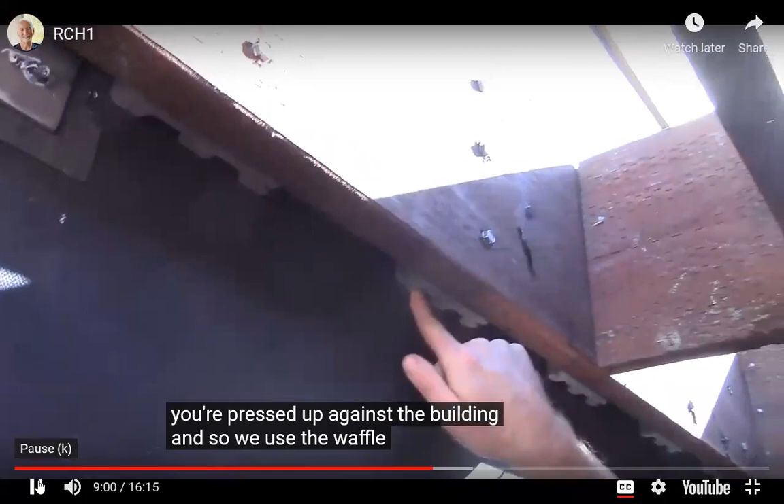So we want to sell - one of the big problems we always come to is ledgers always rot out when they're pressed up against the building, and so we use the waffle Trek decking. Really a good idea, it spaces it off, stands it off, and allows it to breathe.

And then we got a 6-inch SDS screw topped in. And we do on decks like this, wrap Bituthene around the top of the joist, it really goes down underneath, because the two spots that always rot out are gonna be your ledger and then your joist from the screw penetrations coming straight down. And we use, if you use the Grace Vycor, it's actually specifically made and it's all black, self-sealing, so you can look down and see white. It's made for deck tape, and it's awesome.

2x12 blocking, and this is one foot on center. And is it 4/4 net ipe? So it's 5/4 ipe, which is 4/4 net, so it's 1 inch thick. And then I was pretty impressed with the marine ply and stainless steel cup washers and screws.

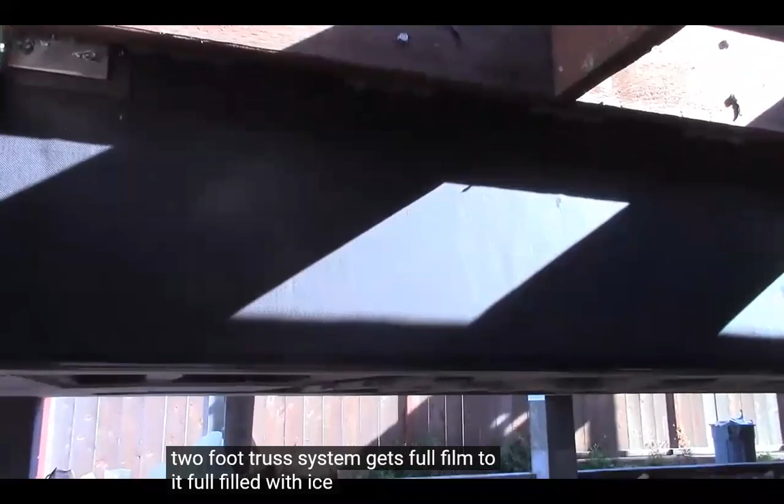Okay, so are those truss joists? That whole floor system is a truss joist floor system. Engineered and made for them. And these are all factory built trusses for the floor throughout. So all the floors where there's living or conditioned space above, that's all those floor truss joists. So they're super strong, no squeaking, really solid.

And then all those 2x12s you saw out there, that's all deck framing. So that's all exterior, and they're all that sunwood pressure treated. Pretty much the living areas, and then the decks. How much are they sinking into this build? Because this is all top of the line components. Are these guys all stainless as well? Stainless and stainless steel. 7 million.

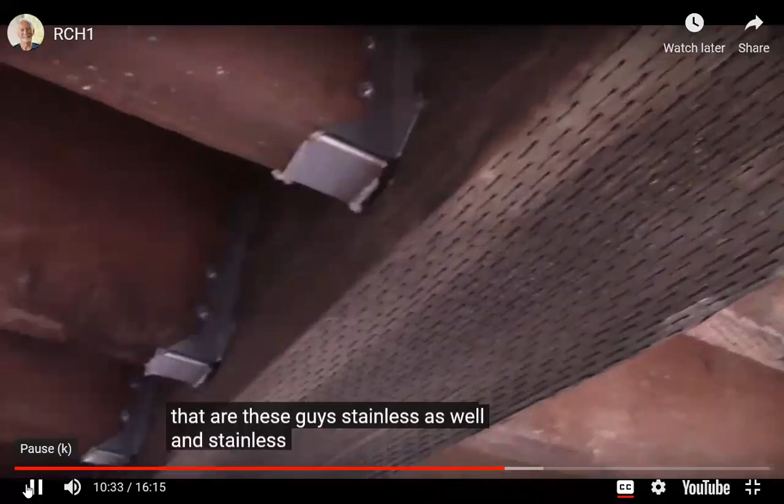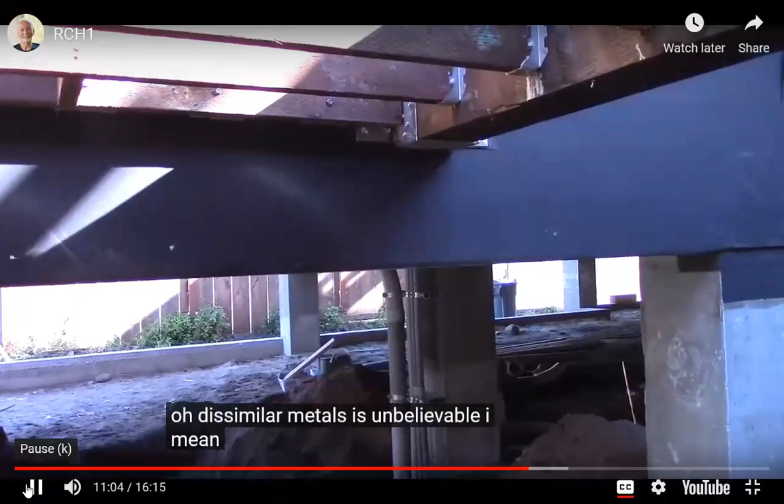There's 70 columns. The new requirements, all galvanized everywhere. I said, well, you use stainless too, right? Well, yeah, but you don't usually envision stainless. Exactly, and that's the scary part, is you get that galvanized touching copper in here. Oh, dissimilar metals is unbelievable, the kind of stuff that can happen. What is it, 400 amps here? Yeah, 400 amp.

And then all of our plumbing will come up and we'll strap it to a column at each location. And do those get boxed or they just stay open? They'll stay up, and we got a skirt wall that runs around the whole perimeter of the building, so it'll have a bug screen. That's a breakaway wall? Yeah. Is it anchored to anything, on a footing? Because of the proximity of the ocean, a big tidal surge could wash right up under the house. The house is built like 8 or 9 feet high.

All those perimeter walls that are gonna be the skirt walls that enclose this foundation are breakaway walls. They're made so that if the tidal surge hits them, they break away and let the water run right underneath. Because the house is sitting on concrete foundations, 70 some odd of them, down well into bedrock. It's a lot of concrete, an unbelievable structure. It's on a stem wall, and that breakaway wall has certain nailing requirements for the top, side and bottom.

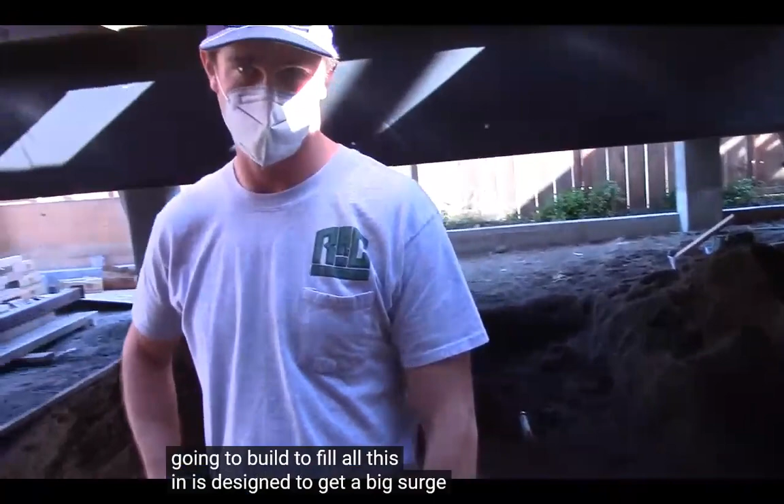They go back to old school shot pins. Fire in the hole. You don't see them very often anymore. No, but the walls they're gonna build to fill all this in are designed so if they get a big surge or a tsunami or a king tide, they'll bust away and water will just go whooshing right through under the building. 74 feet. Yeah, let's see some framing.

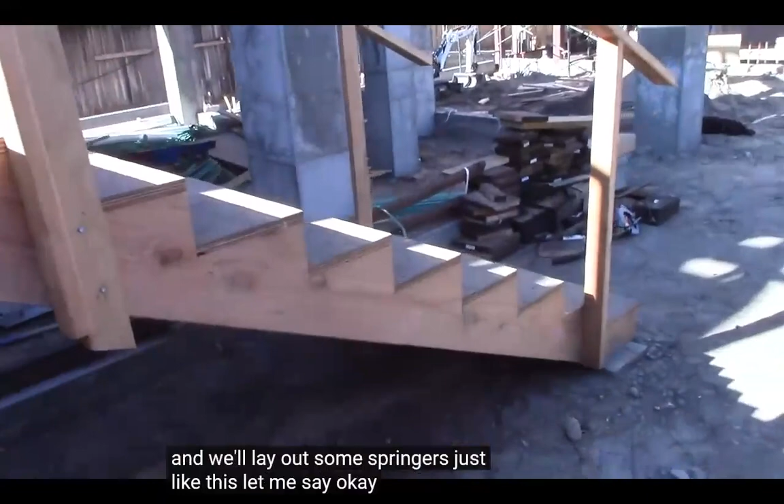At the cabana, they just rolled all the braces, so that's probably our best spot. And obviously a temporary construction stair. I'm supposed to show you guys for lab how to do total rise, total run, unit rise, and we'll lay out some stringers, just like this. Okay, sounds good. Not bad for steps there.

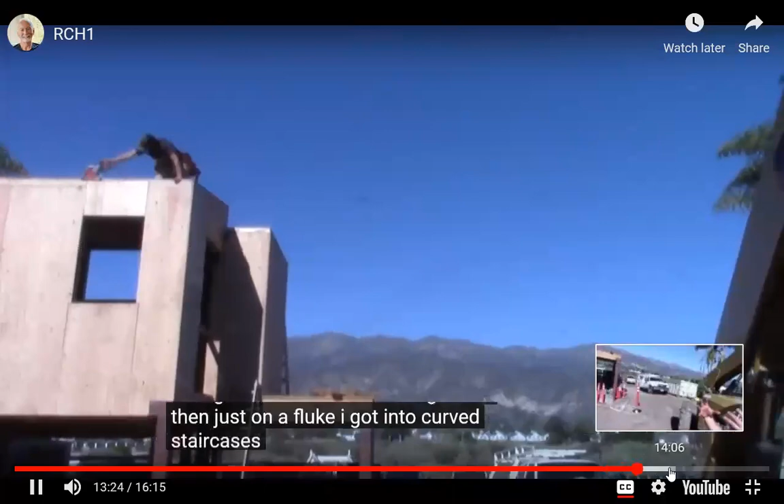I love laying out stairs. It's fun. When I was working as a carpenter, I got into staircases and then, just on a fluke, I got into curved staircases and curved handrails. Once you understand them, it's not rocket science. And really, true radius. But how do we get up there? Can we get up there? Yeah. So let's back up a second, actually.

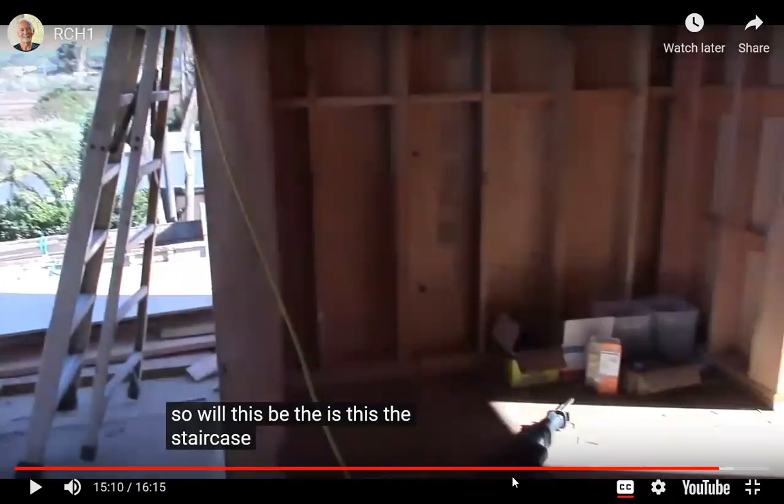Come on, God, I just backed you up. What the heck? That's all I did. How hard can that be? Weren't those IT guys saying it was super fast in here? Yeah. That's what you guys were saying.

And again, I guarantee you, you're not going to be the one going, should we use a steel column here? You're just going to read the plans, or somebody's going to read the plans, and they're going to have that steel column. Somebody above my pay grade is going to choose what goes where.

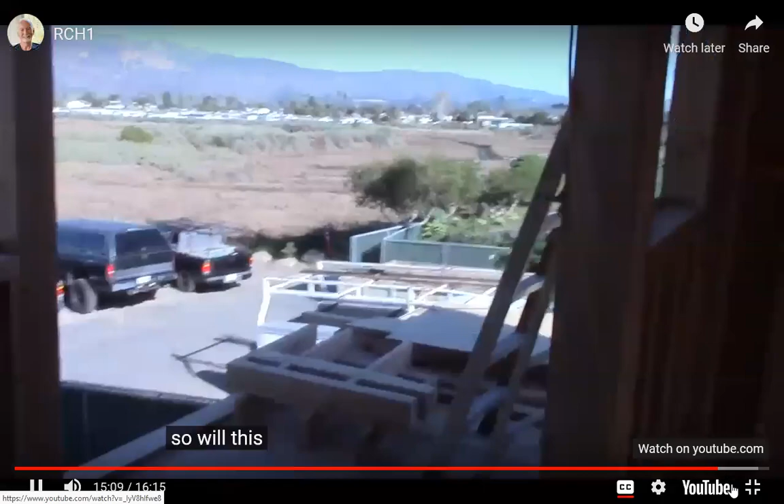Come on, is that a roof frame? An in-wall roof frame again? Yeah, here we go. Big frame, not bad for on top of the garage. Holy smokes. Top of the garage. And that's looking away from the ocean. Is this where the staircase up will be? No. Okay. This is just a deck to sit out and enjoy the marsh and the wetlands. Yeah.

Are you tapering to a center drain? Is that what you're doing? Yep. And that's in the framing. Yep. Last year, last summer. Yeah, so just over a year ago. I don't know where it is now. It's probably not completely finished, probably close to being finished.

Otherwise, you gotta bring this part down, and then you got that much flow, right? Well, you either have to pre-float it, or a lot of guys do the taper rip and then put another layer. So they carved out the LVL joists to make this drain. It's really pretty cool. So they've got to come in and block every 2 feet. Vertical siding. So it makes it a lot more cumbersome for them, but you can see they're so good and efficient.

So vertical siding, right? I don't know what the siding is on it. It's probably some kind of a T&G. I don't know the size of it, 1x5, 1x6, 1x4, whatever, but you can't run vertical siding without blocking. Horizontal siding, your studs are all the nailing you're ever going to need. But if you're going to run your siding vertically, you need nailing, and you only have nailing every 16 inches. So you need blocking. And it looks like they did blocking on 2 foot, which would probably make sense. And again, you're not going to have to choose that either.

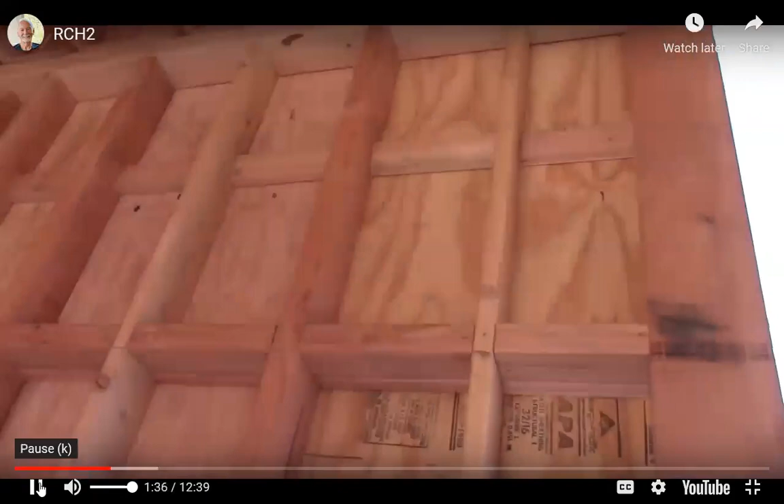It's awesome. So you've got fire blocks, this is taller than 10 feet. You got at least one run of fire blocks, and then these 4x blocks, which are called out for some reason, right? They're shear blocks, because it's a shear wall. These two are shear walls. Yep.

And you're not going to have to think about that either, because you're going to have engineered plans, and the structural will tell you which walls are your shear walls, how many feet of wall is shear wall, and exactly what goes on that shear wall.

The thickness of the plywood, the edge nailing, the field nailing, the blocking, plate, all that, will all be on the structural plans. You see what a huge hassle? If this were horizontal siding, you could nail on your studs. Yeah, because it's vertical siding, you've got to block, and that gives you blocking, and that gives you nailing every 2 feet. So it's blind nail, T&G. Yeah, it's Thermory. What is it? Thermory is like an ash product, and it's all pre-finished. T&G.

Double check. Some are almost like a skip sheeting where a little bit you can see through, so it'll be like a face nail. Which gives better adhesion than face nails, especially when you're using stainless steel nails, right? Yeah, everything's galvanized that's going to get covered and enveloped within our building envelope, and then everything else on the exterior is stainless. And then these clips are stainless as well? Those are not, because they'll be completely covered. And those clips basically just space the sheeting, so they're not butted tight, so they have room.

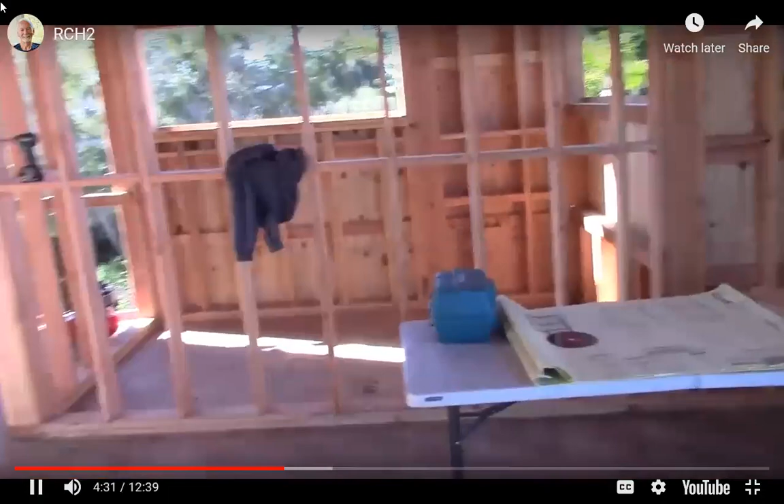Now, this place is platform frame, not balloon frame. You don't have any gable-end walls, which I told you guys last week I like to see balloon framed. That's the only balloon framing we do anymore. But this job would have been balloon framed 40 years ago. These walls would have been full height, and that ledger would have been let in for this floor. This is a way more efficient way to do it. 8-foot studs versus 16 or 20, and back then it was all 2x4 too. Not to mention straight and flat and all those other great things.

Let me ask you this, because I'm going to do a little demo. Are the framers framing with pneumatic guns? Is anybody framing with cordless guns? We've got a couple cordless, but especially when you see the sheeters go, there's no way the cordless could keep up. Have you tried one? Yeah, we've got a couple on site. They work all right, they're just not the same. There's the Skilsaws, the cordless Makita double battery. I have a cordless router, which is so nice, beyond belief. But I'm going to do a demo.

Go get them. Compressors and hoses and all. But the only time we actually hand bang stuff is if you have a 3x sill plate. They'll use 20s and hand bang. Yeah, and there's no gun that's going to take those. No.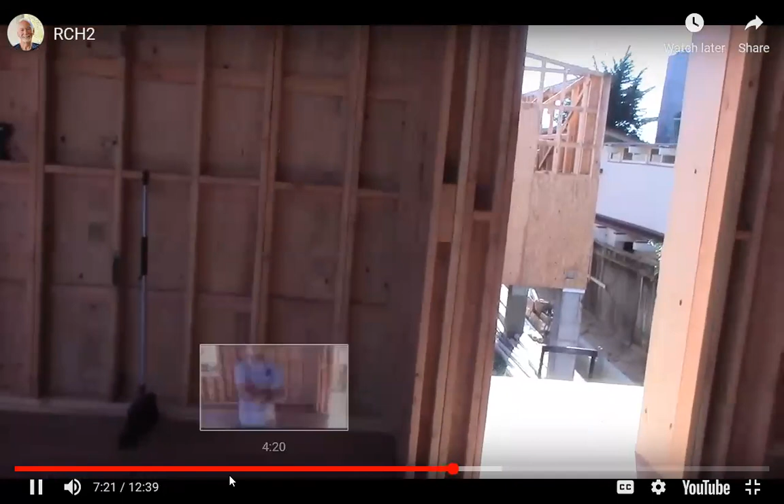So what he's talking about is when you nail through the bottom plate into the bottom of your studs, you're nailing your wall flat before you stand it. So you're able to nail through the plate 1.5 inches into the bottom of the stud with a 3 1/4 or a 16 penny nail, 3.5 inch nail, 3 1/4 if they're gun nails. But if you've got a 3x plate, that's a 2.5 inch thick plate. So that 1 inch of penetration, even 3/4 if it's a 3 1/4 nail, that's not enough penetration in the bottom of the stud.

You have to have more penetration than that. So you have to use a 20 penny nail, a 4-inch plus nail. I think it might be 4 1/4. And there's no gun that drives a 20 penny nail. So all that 3x plate, and a lot of shear walls have 3x plates, has to be hand nailed. So we still need those big death stick hammers.

Double studs, is that for, there's no HDs up here, all the HDs would be done with framing, right? MST strap up here. And we've got a couple places we landed our walls on joists, so we'll actually drill through and HD through the beam for our connection. And throughout, just standard framing, we use doubles for any plywood break, you double up. Just standard practice. And stagger your sheets. Yeah, I see that too.

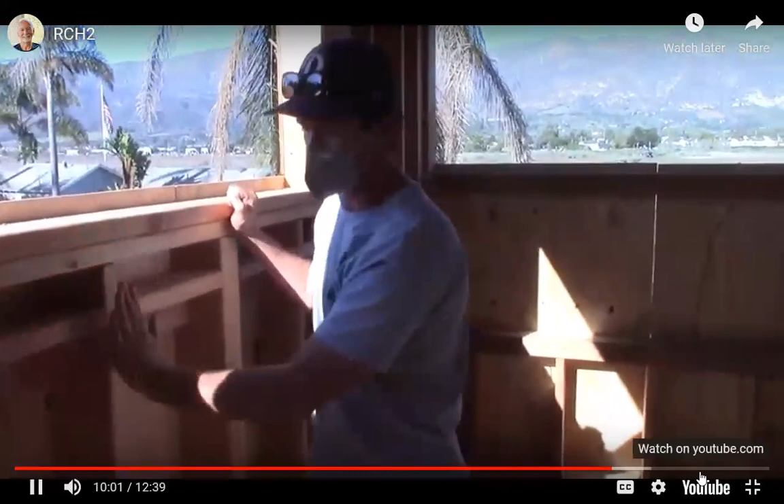Fire sprinklers. So when they frame the roof, we don't have to header out a single rafter. So now we're all the way in the front. The ocean's right behind him. But we won't have to header. Okay, this is really important. Could you please explain that one more time?

So before we stud walls, we go out and detail out after they finish the floor framing, or if we just had a concrete foundation, we detail out every single door opening, mark the opening, finished opening, rough opening. So you're snapping out the interior walls and openings in them? Every interior wall.

Every door opening, and then we fall back, and as they're starting to get their wall packages together, we come back and snap every single thing that's gonna affect the roof framing, while it's a nice clean slate, before you have all these braces and you can't pull big long string lines. So every single can light, every single up light, you'll see speakers, bath fans, everything that's gonna be up in our framing, we snap it out so we miss it.

So cool, man. That's really planning. That's not just framing. And then having your plumbers, especially electricians, come in and figure out the lighting, how best to space the lighting, right? They figure all that out beforehand and adjust the framing for it. These guys are really very impressive, I gotta tell you. As we're roof framing, you can just take that up with a laser.

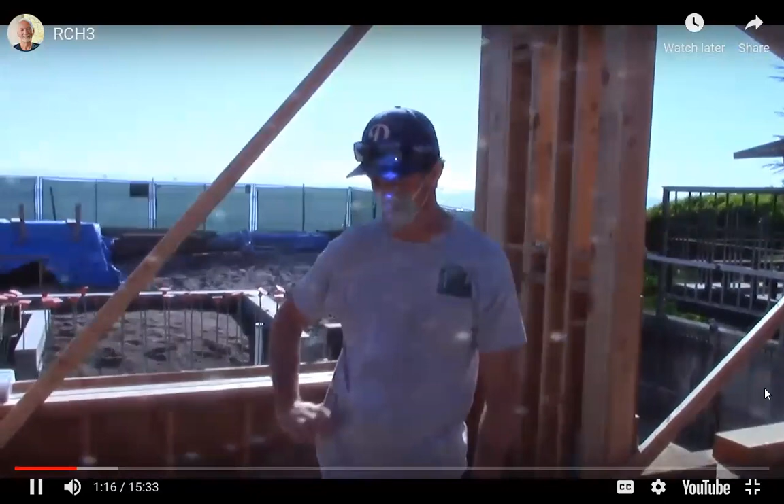And also, do you do all your interior walls on doublers and your joists? You lay out the floor as far as down below? Yeah. A lot of guys like to put their walls on doublers, or at least on a joist. This one was a little different because they're floor trusses. Right. So most of our major walls land on large beams. So we either run perpendicular to the floor joists or try and land one right underneath. But the whole thing is anticipating the next step, and maybe 3 or 4 steps beyond, right?

Exactly. So that when the HVAC guy's going, where do I run this duct? You're not going, oh, shit, I guess we should have thought of that before. Or when the plumber comes to drill for the toilet, make sure there's not a joist underneath there, because you can't modify a truss. You can head out a joist, but you can't head out a truss. I can't tell you how many times on a raised floor, it's like, oh God, it totally goes through. There's a joist, so we have to head the joist off.

You can't head out a truss. You can, but it's very complex, and these trusses are engineered to do a certain thing, and you can't cut them out and head them off like you can regular stock. Right, so with the truss floor layout, we had to think through all of our plumbing, all of our mechanical. So it's that forward thinking that just comes with experience, but it becomes invaluable.

And you're the guy? Your job, right? I get to manage all that. Yeah, and get with whoever's the layout guy and go, okay. Or is it just you? I'm the layout guy. We have the framing guy, so I have someone else to hold the tape. But ultimately, you're not leaving the layout to the framer. No. I mean, they help tremendously. And Billy and his boys are...

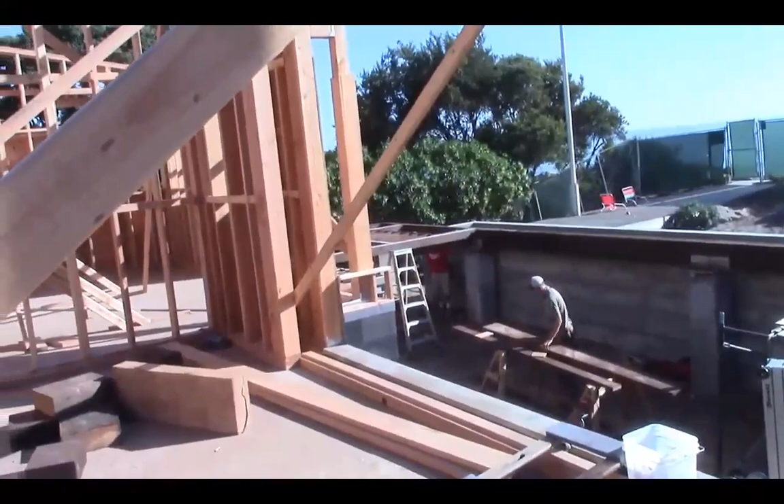And we used to have giant radial arm saws on the job site way back when. Yep. Now chop saws. That's the ocean, the beach.

Hot tub deck. These decks would be so much fun. Can you imagine this place? It's just unbelievable. That's your rain collection tank, that's a rainwater collection tank.

Is this connected to the city sewer? Yeah, so we had to set a sewer junction pump in the street. You haven't gotten to that yet in plumbing, right? Remember what I told you about plumbing, the four things? Shit rolls downhill a quarter inch to a foot. If you don't have a quarter inch to a foot for your excrement to roll down, you're gonna need an ejector pump, rolling downhill with gravity to a holding tank with an ejector pump in it.

So when that level has a float switch, when the effluent gets up to the point where it triggers the pump, it pumps it — it has a head and lift, it pumps it out to the street and up, because nothing flows uphill. It pumps up to a point where it can flow down into the city sewer.

But you look at some of these places on the Riviera, the sewer's up on APS and the houses are down below the street. How do they get their waste out? Since they don't go down to somebody else's house to their sewer, they have ejector pumps and they pump up.

That's rainwater — that's the new requirement they're making you collect rainwater. Yeah, he thought that was septic, and I thought no, man, they wouldn't let you have septic right here, there's no way. So you have an ejector pump because shit rolls downhill a quarter inch to a foot, you don't have that kind of fall. We're at elevation, we're 8 feet above sea level.

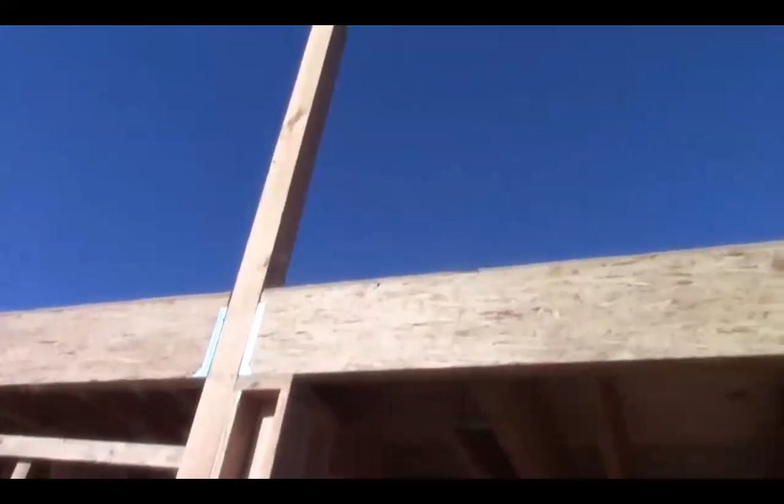Box beams? Yeah, that was it. At one point it was a full box beam. We made box beams for Peter's station — check out that, we made a 2x12 header, a U-shaped box, and they really look like they support. We use box beams all the time.

Usually Mark Mills is the one that makes it for us — very good guy, you can't go wrong with him. I just met with Joe this morning, spent a bunch of time with him, Tom and Joe. So when I started doing this work, I worked with Ron, with his dad. I would take stuff to be shaped for them, and they've just always kind of been my gurus — cabinet and millwork gurus. Their shop is just unreal, I love the shop. I'm super jealous, but the older I get, the less jealous I am of anybody.

Is this a pass-through? What is this? Another niche for the bathroom. This is a big shower. You got the right idea about features, right? And what are these pads?

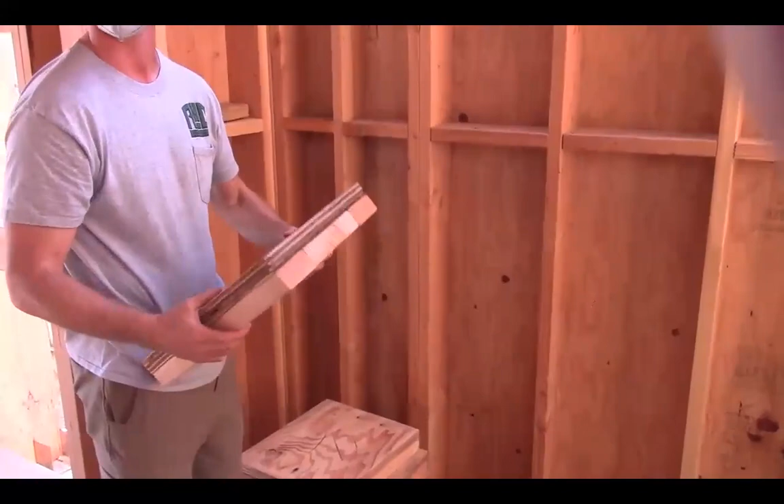We've got a larger scale over here, but we've got our gutter detail, and it called for a solid block. But dimensionally, lumber-wise, we couldn't find anything that would work and be cost efficient. So we worked with the engineer to come up with basically a truss detail essentially, and into the mix we'd have good proper nailing and nails that would punch through — that's your blocking. I love it. That's blocking for where? For this one, yeah, the gutter detail. Oh okay, so it's a recess — it's a block below the recess to carry that gutter.

That in there. So you like chew wood? You know, my dog does too. My wife thinks he's got pica, which is that thing dogs get where they'll eat anything, but I don't think so. He just likes to chew. Oh yeah, he's that.

He's pulling out TJI 230s. Oh, it's really clean, man.

So when are your framers back in force with the roof? Once we finish this deck framing out here, then we're gonna get right back on the roof. The framers are now out doing the deck. Yep.

Yeah, it's like come here every day, right? It's constantly just fun stuff coming up. It's not by any means perfect, and these guys are really experienced, really good framers. They had their layout stick, laid everything out, and they ended up being off by 3/4 of an inch. So even the best framers can make simple mistakes, so checking those simple things matters.

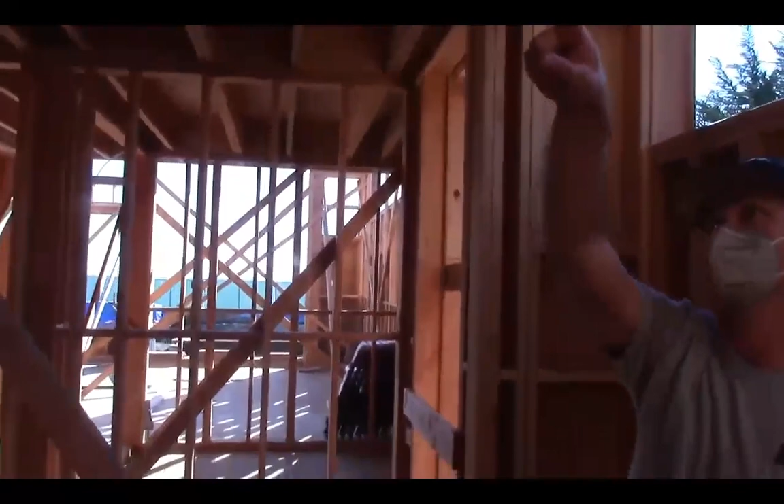So we actually stacked the roof, so we had to come back in and cut out a top plate and add 3/4 plywood. So their elevation was off 3/4 inch. And with all the height restrictions on the beach, we had to be tight.

Wow, but somebody saw it at some point before it was too late to fix. Well, it played in and we had all our header heights figured out, and it matched up with our ceiling heights, and they were off.

So your windows are just gonna, the ceilings are gonna plane into the windows, interior, which is a really tough detail. So when you're talking about contemporary details, that's a contemporary detail. Yep, it's a bear to pull off.

You have virtually no slop, right? Especially with pocket doors, man, because the head's another 2 or 3 inches taller. So we're gonna knock out all these beams. Oh, right here, that's what you're talking about. Yep, is this the pocket wall here? This is, yeah, pocket door.

Right there, that got knocked out. I think I'm focused on it, yeah. And then we started doing it here. Yeah, there it is. Don't ever get old, Alex, just kill yourself. No.

Yeah, so the details are just never ending, and they're not gonna stop. I mean, you're just kind of beginning in some ways. Well, not really beginning, you've been into it for a while, but that forward thinking now is, you're thinking 3 steps and 5 steps ahead. And in a job like this, if you don't, you should not be doing this job. We've got a really aggressive schedule and an owner that really wants this done as soon as possible. So that's what we're fighting, we're fighting delays we can't afford because we didn't think of something.

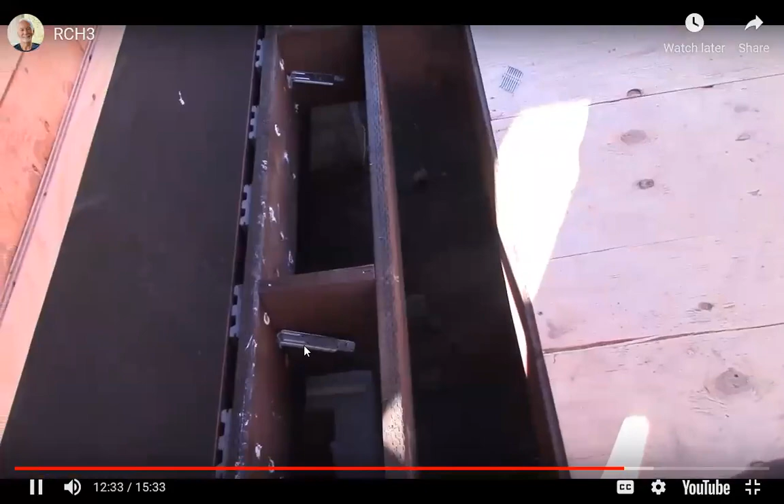People spending money on a lot. And have you seen these? They're DTZs, they like a fold down for the deck. These chairs? Yeah, they're just hanging. Are they installed? No, these guys are installed. I've never seen them before. Whoa, wow, these are called out. Yep, that's cool, never seen these before. And they're stainless as well, I guess.

Huh, yep, and they're deck hold downs. So they go through the ledger and into the rim joist. Yep, and they're Titans, is that what they are? DTZs. Okay, with that 6-inch STS screw. Wow. Brand new fastener, I love this detail.

Probably the standard, putting all this stuff. Oh yeah, you think about it, this thing could get away. That's the way of our life. Yes, yeah, it's true.

For the pocket. These guys do a really nice job where they don't overcut it. That's clean. This LVL is engineered to lose 2.5 inches, and it was in the structural details. So that cutout right there, that's going to get a header for a pocket wall.

We're going, well, can I do this? Yeah, it's okay to do. And that's where Rick really helped out. Yeah, that's what I find too. It really helps out. The sooner you get the people that are actually going to do it involved, the better.

Is everything else vaulted? Everything else is vaulted, so there won't be any ceiling joists, there'll be rafters. Well, a couple of ceiling. That one nailer was for a chase. Is it for the bathroom seating? Yeah, it changed, just a little bit of dead space.

And with that clerestory window above it. Up there. You are phenomenal, your project is phenomenal.

These last couple are really short, like a couple minutes each. This one is a minute and 18 seconds.

Put a piece of bituthane right here. So that piece of plywood is just hanging, this sheet of bituthane, because they're putting some deck members up against it. So rather than go wood to wood, they're going to go wood to bituthane to wood.

I glued my fingers together with some cyanoacrylate a couple months ago. Yeah, for this weird stainless wall. It's horrible, man. Yeah, don't ever do that.

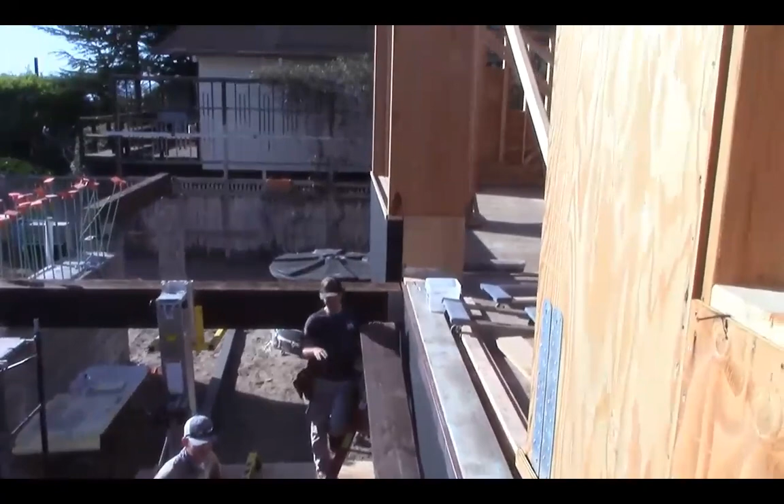There's the deck for the hot tub. So the hot tub's going to sit on this guy, which isn't going to rot out anytime soon, and pour over it, it's going to be all steel, not quite flush with the deck, a little bit proud. It's 18 inches tall, 18 inches above the deck.

Love that. So cool. This is unbelievable. That was 4, 5. This one's only a minute.

Then throughout here, see, these are double top plates, and the double top plates help tie a perpendicular wall it's tying to. But what I wanted to show you are these double bottom plates, which is a real anomaly. It's a double bottom plate because they're going to lose probably 1.5 inches of floor for mortar, lightweight concrete, and a warm floor. It's going to get a warm floor, and I'll tell you about warm floors at some point.

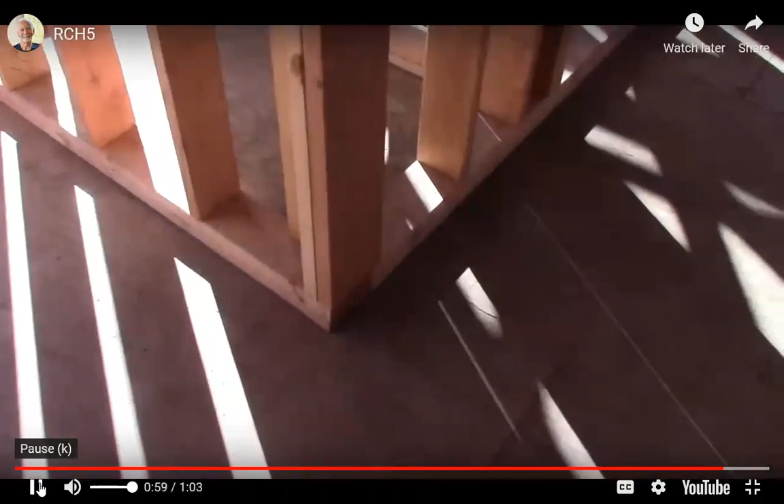So they're going to lose about 1.5 inches. They're going to lay clear PEX tubing that will take hot water, and they're going to pour lightweight concrete all over that. Then they're going to do a finished floor on top of that. So the floor will be heated, the house will be heated from the floor.

And then lastly, this one's not even a minute, I don't think. I have these little small ones, 33 seconds. They cut this out from underneath the entry cantilever for the deck, for the unit over the garage, and I wanted to show you. You can see how they scooped out.

These LVLs, and they sheeted it with the scoop in it, so they'll put a drain in the center where it scoops to carry water, and then of course they'll plumb the water. You can see that pipe right over there, that's for roof water. All the drains are in the wall, and they'll daylight somewhere.